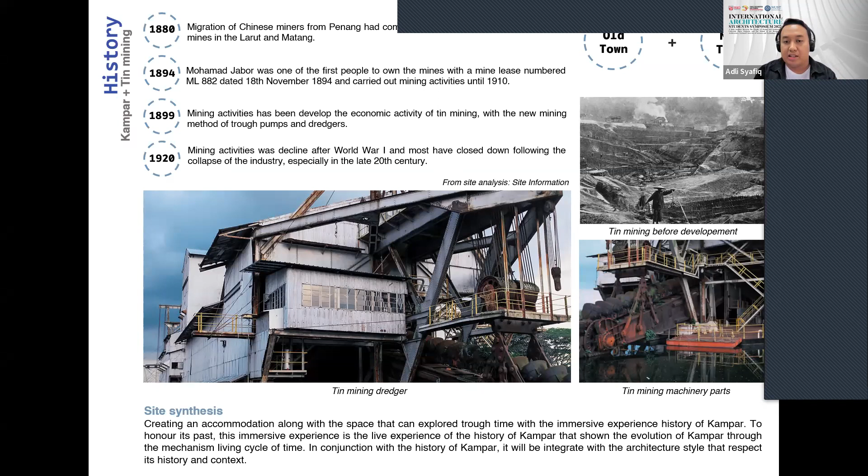So from this history, let us dive down on the precedent studies which I've used towards my design, which is in Nanjing, China, which is the Rural Relation Museum Hotel.

This hotel is actually reflected to its site historical. There's use of immersive experience towards the spaces and towards the material also. So this will give some sort of intangible feeling that will bring the visitor or the hotel guests to feel the historical feeling of this hotel.

And then the second precedent study, which is also mentioning about a hotel, but this is about the Crane Hotel. This Crane Hotel was previously used as a coal mining machine, but now has been reformed to be the Crane Hotel. They are maintaining all the materials, the paint, just to reflect the history of this coal mining machine at Denmark.

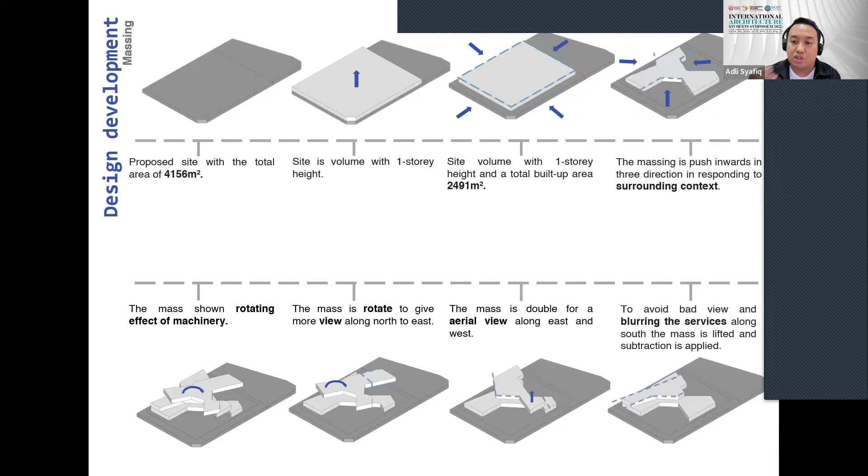And also the volume is volumed up because of the blurring of the services. But the main important idea of this massing is actually to show the rotating effect of the machinery.

And then comes to the thematic hotel, which is the public spaces of this hotel. There are 5 main public spaces, which is the lobby. They integrate the living history of Kampar.

And actually the name of these spaces also reflects the name of the tin mining process, which is the Dulang. It is called Mendulang, which is a method of separating the tin. And then the Dulang Cafe, which is the cafe that is floating in the air.

And the third one is a time tunnel, the Melampan. The Melampan is something that shows this, because it looks like a tunnel, so that's why it is called time tunnel - because this space will bring the people to the historical of Kampar from the past, present, and towards the future.

And the fourth is the library, the Extract. It is also one of the names of the extraction of the tin mining. And the last one is the Vein - it is the gymnasium. The Vein is one of the names of the tin mineral.

And we are going to the guest room. There are 5 guest rooms, which is the Kaolin. The first one, the Kaolin - this guest room is named with the tin name, which is the kaolin, the ore, the mica, the feldspar, and the bauxite. These 5 are the types of tin that present in Kampar.

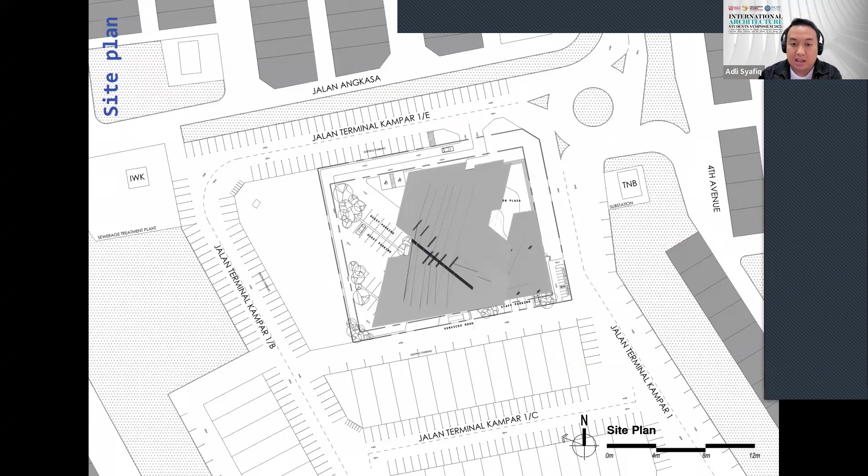This is the overall site plan showing the rotating effect of the Kampa, and also on the roof there is some structure to show the machinery effect. And this is the ground floor plan.

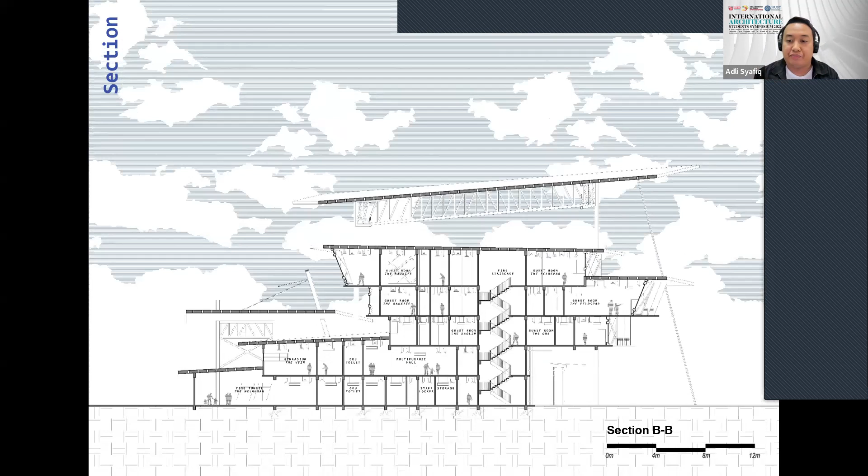So this is the section. As you can see, there is richness in the structural exposition here, because it mimics the idea of machinery of the tin Kampa, tin mining. Sorry, this is also just to reflect the idea of the tin mining industry in Kampar.

The passive design strategy used here is a self-shading building, because there are many cantilevered floors towards the upper floors, so that the floor below will not get much light glare. There is less natural light glare towards the inside.

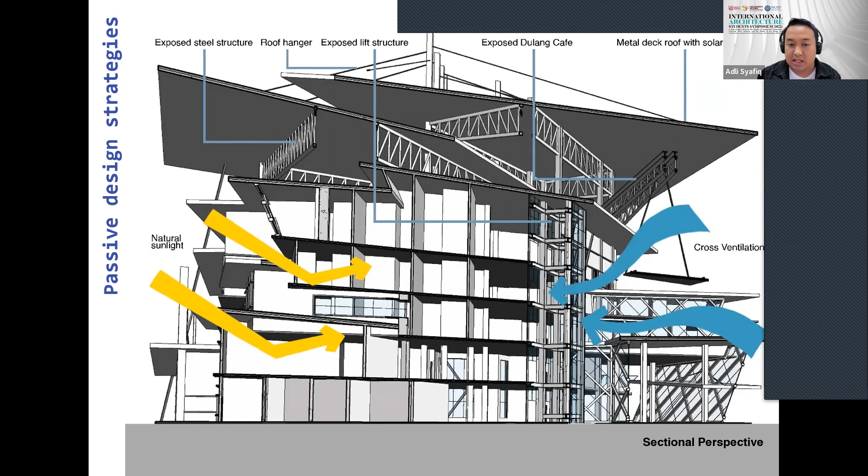And this is the exterior view. As you can see, there is the Dulang Cafe, which I mentioned just now, that is floating in the air. At the plaza below, people and visitors will also see the beauty part of the Dulang Cafe, which symbolizes the tin mining industry.

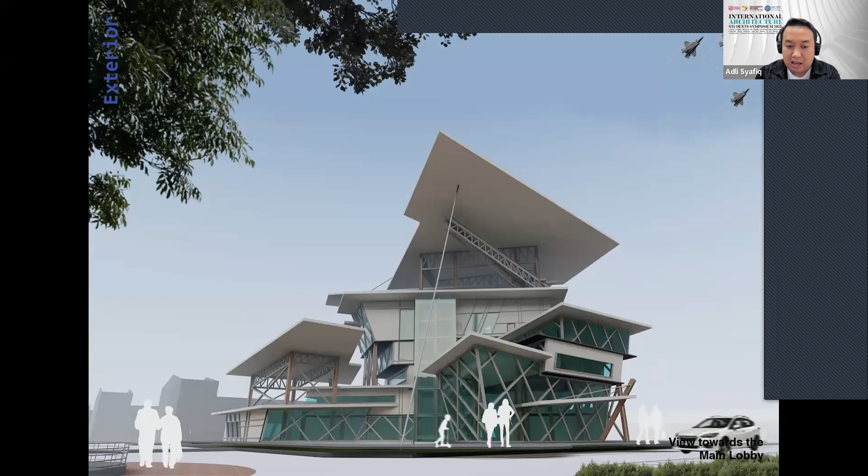And this is towards the main lobby view. And that's it, thank you.

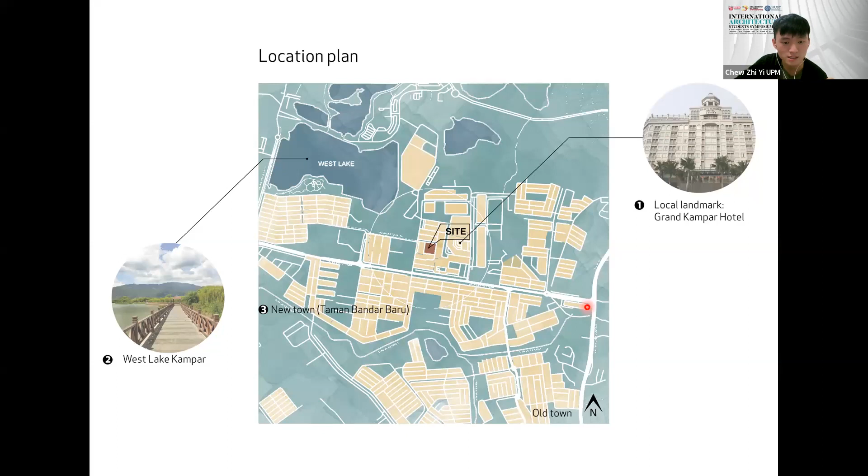Secondly, West Lake Kampar, located at the far northwest side, offers a great view. Thirdly, a slight introduction of our site: it is located in Kampar, which is divided into New Town and Old Town, and our site is located in New Town. I'll be explaining their difference shortly.

The shop lot surrounding the site is a unique feature itself. It implements European architecture language. The business comprises cyber cafes, reading lounges, hypermarkets, printing shops, etc.

A little info about Kampar is that the majority of the people there are Chinese, followed by Malay and Indian. Kampar is an educational hub itself.

For the strength, our site is at the center of businesses, and we would like to foster the cycling culture there. The weakness is that it lacks shades and public space. The opportunity is that it has potential to have an open plaza and green space. However, the threat is that the night is silent, and people often relate darkness with danger, hence low sense of security.

Enough of the analysis, let's jump to the synthesis. This is a collage that I made that represents the idea of turning the nighttime into a place with strong cultural value and an interactive gathering place.

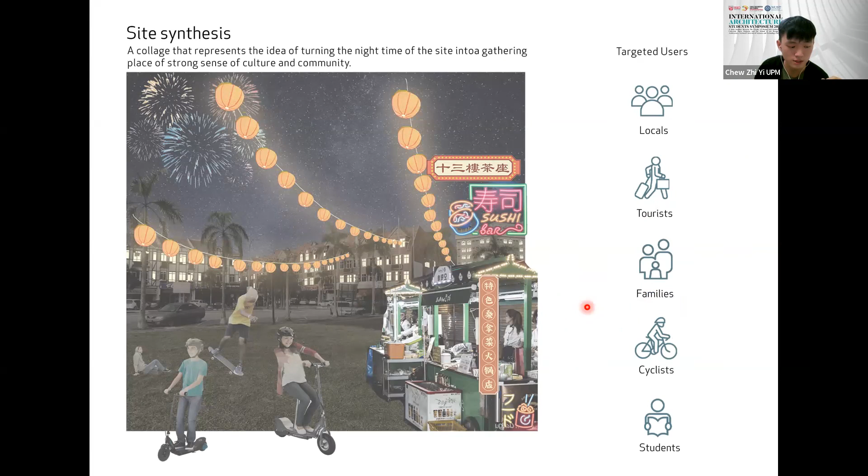I'm a local in Kampar, and when we had our site visit, it reminded me of my childhood here. It reminds me of how fast my hometown has changed and developed throughout the years. During the site visit, I perceived bits and pieces that I had not paid attention to before.

I'm attached to Old Town, and now there is the New Town, which is totally different from the Old Town. In terms of the architecture language itself, it's totally different. The New Town has a European architecture style, while the Old Town uses vernacular shop houses.

In Old Town, we still have this kind of watchmaker shop, which I remember my grandpa brought me to, to fix my watch. And then I remember these old grocery shops that I always fantasized about, buying each kind of snacks and biscuits. Back then, they didn't have fancy packaging, only these metal containers that you need to use a spoon to crack open.

And then there's this bus stop that I used to wait for the bus at after tuition classes, and now it's gone, moved to the New Town. And then there's this old TV that you need to give a few love smacks for it to turn on magically. And then there's this coffee shop that my grandpa used to bring me to.

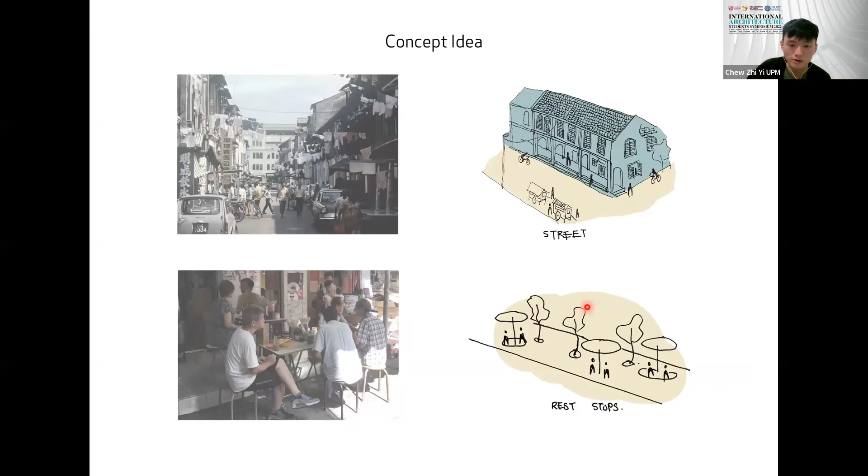That's the coffee shop, people used to gather there. So why not suggest rest stops for people to gather around in my building as well.

During the past, not every household had the privilege to own a television, so people would gather around one person's house and watch football or TV shows together. So why not have a public theater and art performance area so that everyone can watch together.

And during the past, we would have food and hawker stores along the streets, so why not have this same kind of element in the building as well. So I've reached my design approach.

As you can see, I have a street tilted along an exit that opens up to an opening, creating an opening to the Grand Kampar Hotel, the local landmark, which has an implied meaning that it connects the old to the present, the past to the present.

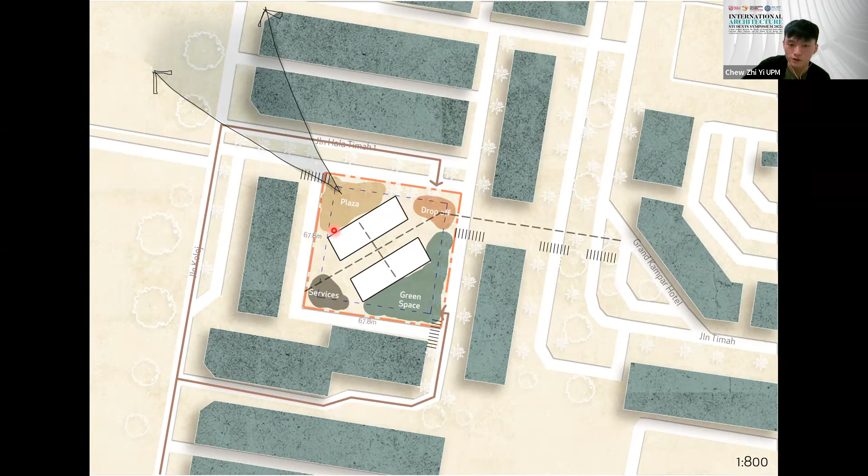And then there's a plaza that opens up to the lake, the West Lake, if you remember. So if my building builds up enough with enough height, it can oversee the great view at the West Lake. This is the design development.

Firstly, I've got the existing ingress and egress ready, and then I introduce a street that breaks the mass into two. And then I introduce an identity for the building, where the curvy roof is derived from the traditional clay tile roofs from vernacular shop houses. And then with a little bit of facade treatment, some voids and solids, it becomes nice.

This is the design outcome. Firstly, there's a street along the center that opens up to this junction. And at the ground floor, it's fully public. There will be coffee shops and then shop lots.

The general intention in designing the ground floor is that it would be inviting and welcoming to the people. People from the road can access the coffee shop and then the street, while people coming along the street have the view open towards the coffee shop as well. So it's like a double frontage.

Moving on to the first floor plan, when we build up in height, the space changes from public to private space. So on the first floor plan, we will have private spaces like the accommodation suites, and a mixture of public spaces like a reading lounge for students, because Kampar is an educational hub, and then there's a coffee shop, which we locally call kopitiam.

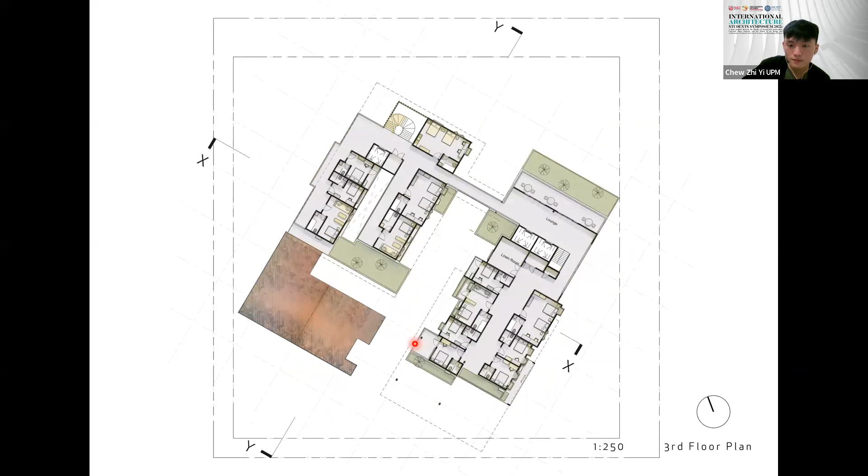And for the second floor, we will have rows of accommodation suites, same with the third floor plan. And with the fourth floor plan, we will have a rooftop bar that faces the northwest side, where you can have a great view towards the West Lake.

I have several types of hotel suites, so with this different type of hotel suite arrangement, it creates depth on the facades. This is a section. So the ground floor would be shops, a public space, and then built up higher would be a private space for accommodation suites.

This is a sectional perspective. We will have a street at the center, so the ground floor would be fully public, with double frontages that invite people to come to this place. Well, if you live up there, you can oversee these crowded and busy streets and enjoy this kind of little neighborhood community here.

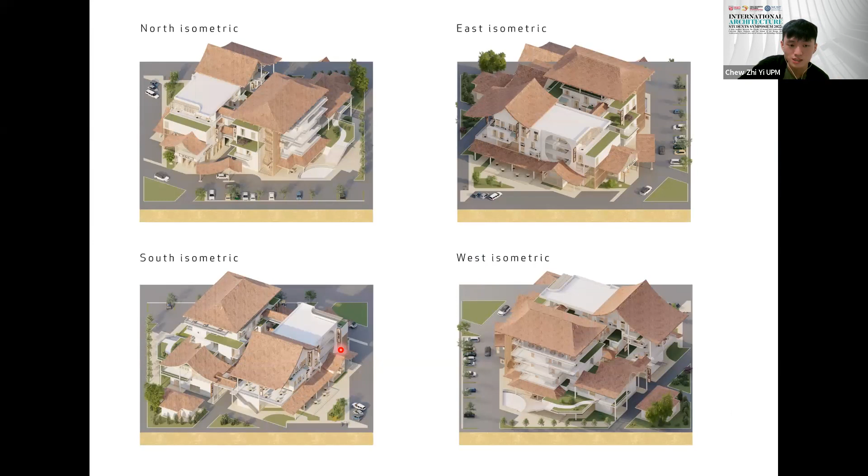That's what I'm trying to achieve in this design. This is the isometric view of the building from each side, and the elevation. So I play with different heights, creating different heights and depths so that the facade will not look boring. So the outcome is that on each of the four sides, the view is quite interesting.

I figure that an exploded diagram really helps you experience the space. So on the ground floor, the double frontages, the street splits the mass into two. And on the first floor, you can see there are numerous accommodation suites. They are arranged in a way that leaves a certain small space between them, to create a green pocket that invites ventilation and light into the building.

This is the second floor plan, second floor isometric. Same again, it comprises accommodation suites, but with green pockets between the suites. Then on the third floor, we will have a sky bridge.

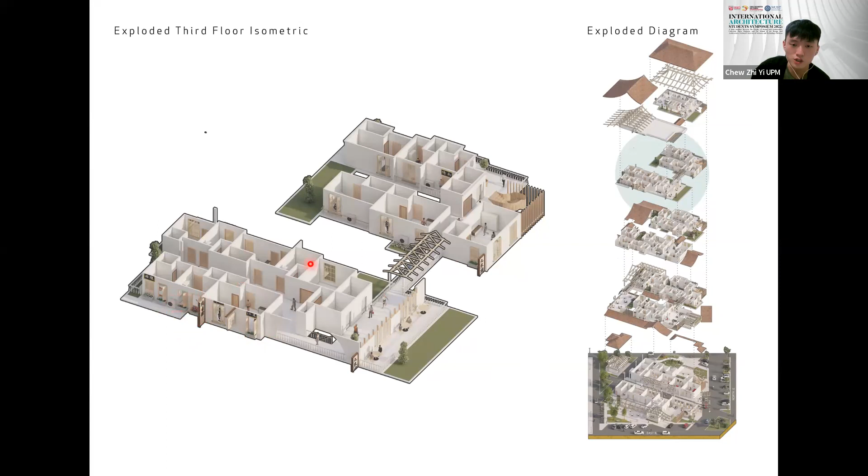And if you notice the facade, I tend to reveal the services like the air conditioner unit. People tend to conceal it nowadays, but in the past, people made it an element on the facade itself, like the advertisement board, the planter box, French awnings, and the air conditioner units. They make up the elements on the facades.

This is a fourth floor plan, and this is the topmost floor with a rooftop bar on top. In Malaysia, we are a tropical country, we have a lot of rain, so we need large overhangs to cover the space.

This is the interior perspective. What I want to achieve here is to break the norm of typical hotels, typical hotel rooms. So what I want to create here is a hotel that makes you feel like home itself.

Therefore, I reached the end of my presentation. I want to explain why I named my project Belonging. It has two meanings. First, it represents my sense of belonging to this Kampar, to this place. Secondly, it means a period of time I want to go back to, but we can't reverse time. So what I can do is be yearning and longing for this era. By the way, this is a sectional perspective cut that cuts along the street, so you can see the shop lots on the ground floor, while there's a nice community neighborhood on top that makes up the upper floors.

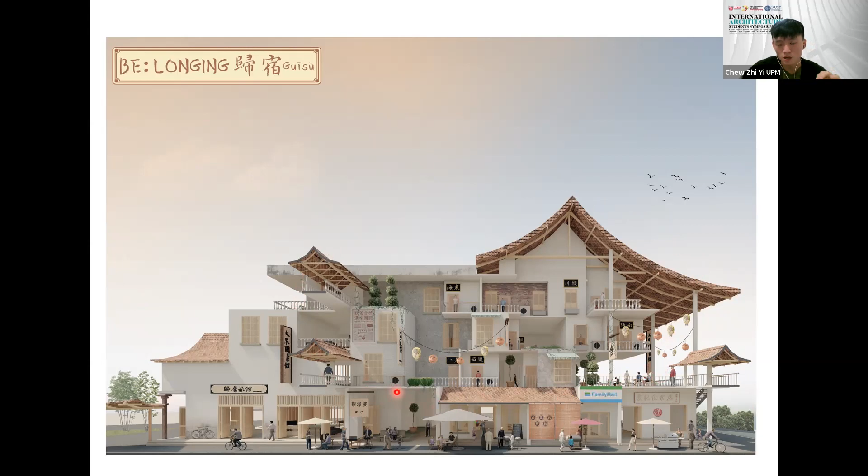Thank you. If you want to have a look again, you may access it with this QR code. Thank you very much, Zhi Yi. It really looks like an interesting concept and project.

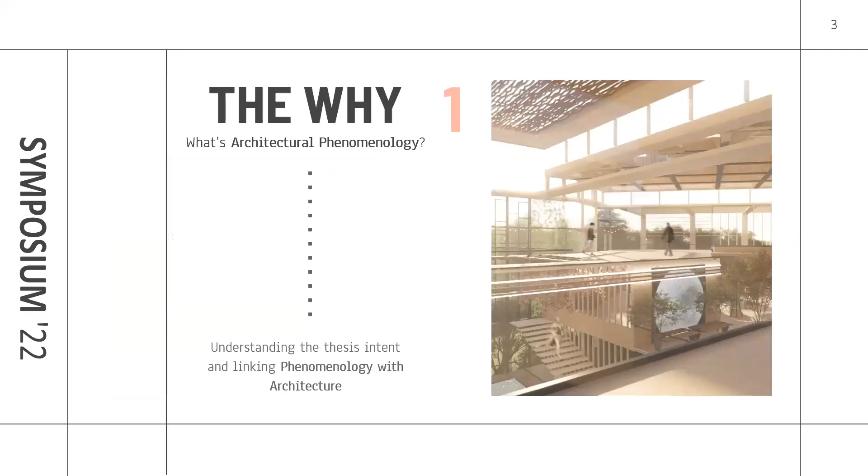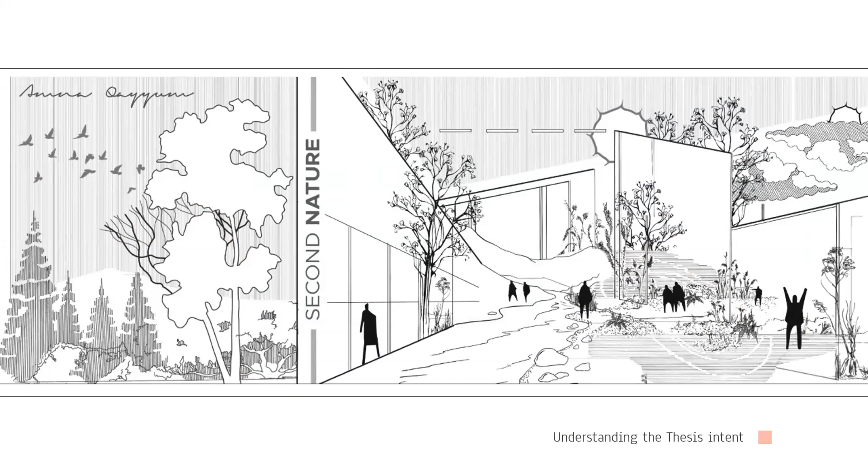One way to exhibit experience is to understand your context. This here is my school, Sada, but to help you understand, the concrete structure is not where the phenomena lies, but rather the experiences, perceptions, and associations of people with this building. That's what this concept sketch shows. Underneath the built realm, there is a whole realm of subconscious associations which have the potential to be manifested in design. It's in those forgotten experiences where we find human experience.

So how did I go about that? To understand that, we have to see the subconscious experience I focused on. I live here in Islamabad, and here we have this eco-grid that runs under this 2 by 2 kilometer vehicular grid. So as a resident of this city, you don't really perceive this eco-grid while traveling on the vehicular grid. That is something that has fallen into the subconscious of the people.

Interestingly, in the initial planning of the city, they wanted these ravines to be a very integral part of the lifestyle here. It was supposed to be explorative, nurturing, and recreative. I created these sketches to showcase what the initial reality was supposed to be. But what's happening in the current situation is that these ravines have deteriorated into carriers of urban filth, and they are now really just thought of as a nuisance to city life, not very important anymore.

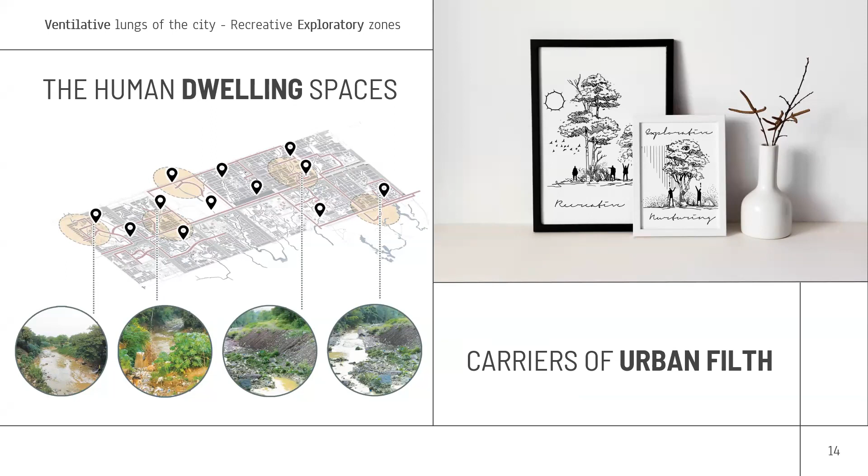Hence, the focus of my thesis surrounds the uplifting of that forgotten network of streams in Islamabad and bringing it back into public perception. For this, the typology of a nature interpretation center was sought after as a means to encapsulate the beauty in this natural attitude.

This is the program list, but in short, there were primary and secondary programs. Primarily, I wanted to create an envelope which captured the feeling of walking by these ravines and the natural flora of the place, which I represented through these sketches as biomes. Secondly, I wanted my building to play a part in purifying the wastewater infiltrating the eco-grid through a series of self-cleaning constructed wetlands. I'm not saying the building fixes all of Islamabad's problems, but it is meant to highlight the beauty of these forgotten spaces and the need to preserve them.

So this is coming up the site. The site itself is pretty fitting for a nature interpretation center in the sense that it is this beautiful historic garden in Islamabad, which is well connected to the urban realm through a series of pedestrian and vehicular linkages.

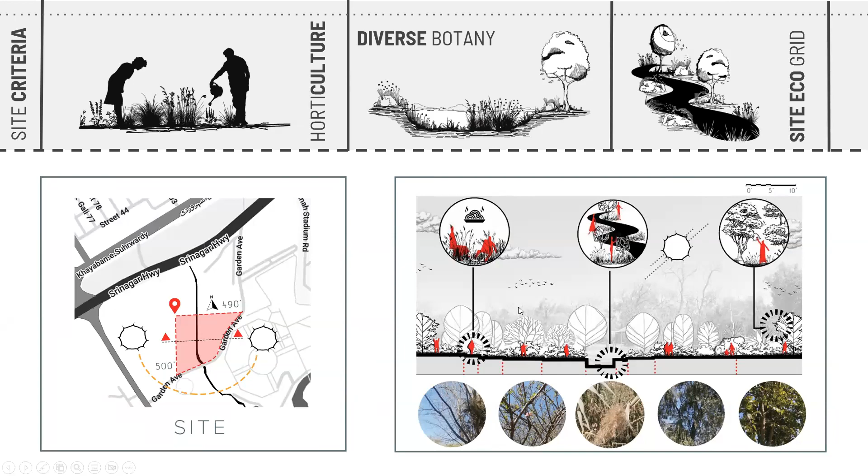It fulfilled the requirements of an existing space where there was already a fondness for the environment and all its natural elements. It's a space where people of all ages come together as a collective to sit amongst its trees or to occupy its open spaces.

But due to human interventions, the site still is deteriorating quite rapidly. So this is actually a documentation of the stream that's passing through my site. And this white fluff is actually chemical waste that is released into the stream water.

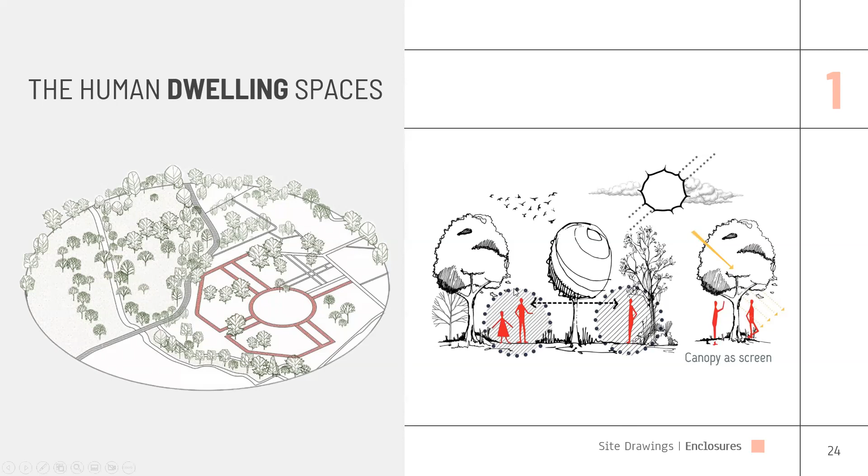So I felt that my nature interpretation center could help purify the site, but also bring together the community and showcase why it's important to preserve these spaces, especially because Islamabad is nicknamed Islamabad the Beautiful or the City of the Streams. So the way people interacted with the site was noted, and only four techniques were extrapolated.

The entire building was built keeping in mind how people were interacting with the site and how the natural factors played a part in accentuating this experience. That intangible experience was translated into the building envelope. And finally, the design synthesis.

So the focus for today is going to be the biomes, which are going to exhibit that botanical diversity that we see in ravines. This idea of permaculture, which talks about the recycling of organic waste generated from the various entertainment areas to propagate plant life, and the upcycling studio.

So this is how the building actually sits within the site. Next to it, we have that rose and jasmine garden, which is a very geometric form. I haven't really included any parking in the site area because I wanted people to walk and make their way through the garden and into my building, experiencing the sights, sounds, and feels of the garden. The only parking would be the existing parking for the garden, but that's pretty much it.

The programs are strewn across the built form, creating a journey as you travel from the sweet-smelling garden to overlooking the stream passing through the site. The floral and wet and dry biomes are all located next to the relevant markers on site. The form was optimized to bring in this idea of porosity, this idea of light, and vantage points through leveling.

So let's talk about the entrance. I wanted people to experience the beauty of the flora of the garden and the sacredity of these spaces within Islamabad. I wanted to capture the feeling of light breaking through the leaves.

And hence, moving from that brightly lit landscape of the garden, owing to the short heighted flowers here, we come into the low light of the interior that I designed. And that talks about a certain level of sacredity as well.

The rustic material palette, the open and ambiguous spaces of the entrance, it is what greets you upon entry. Nothing is set in stone, and you're allowed to explore as you will.

So this is just an animation of how the light starts to filter in, and it starts to give way into some of the first biomes.

So the first biome had to be special. I wanted it to be related to that garden that people just walked through. So the first biome was going to be the floral biome.

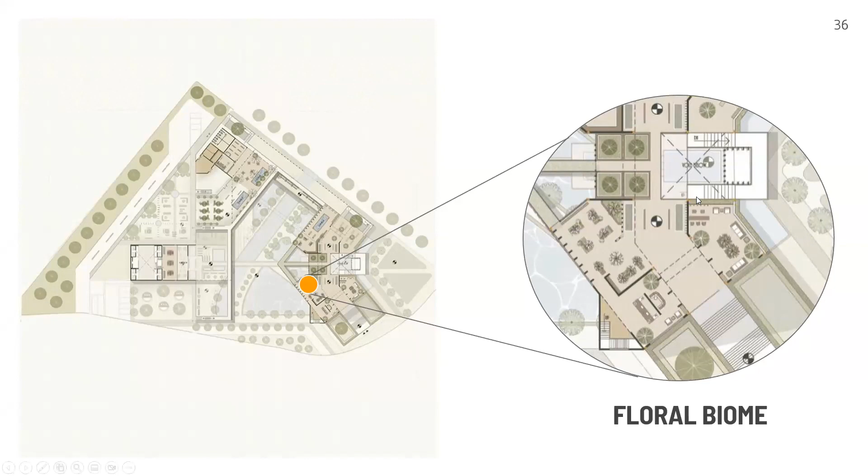Here, the native flora of the ecogrid are represented in low-lying modules. And the reason they are low-lying is to mimic that short heighted flowers of the garden.

But more importantly, right here, you can see that when they come closer to inspect these colorful beings, you catch the first sight of this stream flowing through the site, encapsulated by this mirage of flowers reminiscent of the original eco-grids of Islamabad. The architectonics of the space have been kept very minimal to prevent any obstructions to the view of the water. Essentially, the entire building is about framing this body of water from different instances.

The plantation throughout the complex is kept alive through a series of hidden techniques, which regulate the temperature and moisture content within these enclosures while being invisible to the users. So this would be in the form of these chilled slabs and porous roofing for temperature control, as well as specifically designed modules.

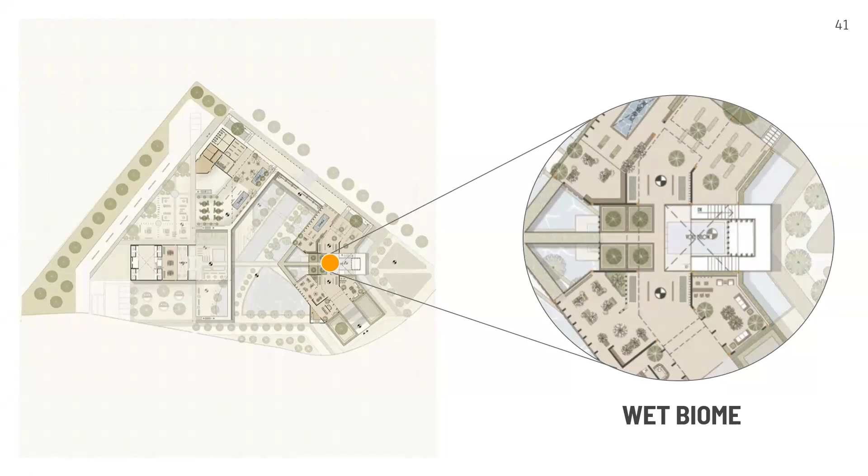So showcasing the water is when I decided it's time to feed into that curiosity and create that wet biome. This comprises plants that require high moisture content to survive. The wet biome is special because it spans across two levels. The user sees it from a higher vantage point before getting to experience it in person, and these playful hints of what's to come keep the user moving forward through voids and vantage points where you peer into the biome first.

Here you can see the leveling design for the wet biome and the thatch roof that's constructed with aqua reed. This plant is only found near stream water in Islamabad, so that was a special consideration on top of this biome.

Next is the dry biome, which is characterized by plants that do not require higher moisture content. The dry biome is purposefully placed next to the tree enclosures on site so that when you stand here, it feels like a continuation of that tree line. An understanding of solar orientation ensures that light always breaks through the tree canopies before being allowed inside the building.

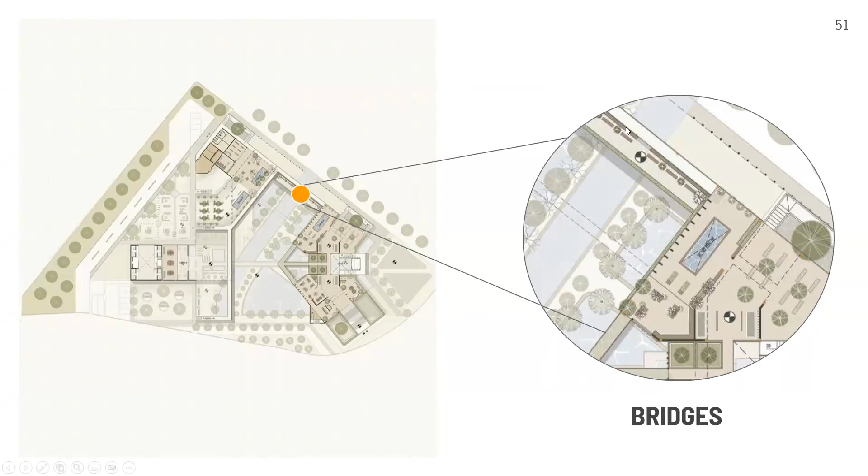Next up is the network of bridges that connect these two portions of the building, allowing you to once again walk over that stream water and become acquainted with the site. All three biomes are experienced through a similar series of bridges, creating alternating solids and voids within the design. This image showcases how you would actually cross the bridge and where the trees are located so that you would always be connected to them.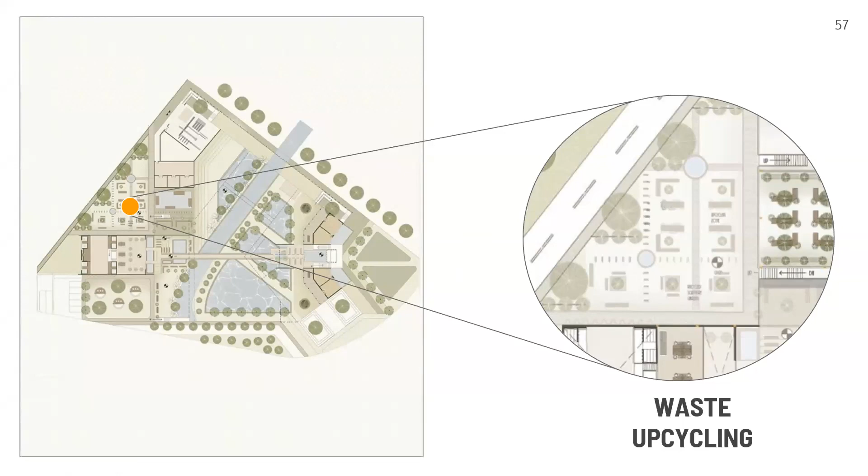Finally, we have the waste upcycling area, which is really just an open-air creative studio where inorganic waste collected from various points around the site is sanitized and repurposed by the community. It not only acts as a creative outlet for the community living around the garden, but also one of the first public ventures for the citizens of Islamabad.

Some links were made with the adjoining Aabpara market, which was a major source of inorganic waste coming into the site, so collection points could be created here so that they can be repurposed in my building.

And that's pretty much it for me. Thank you so much.

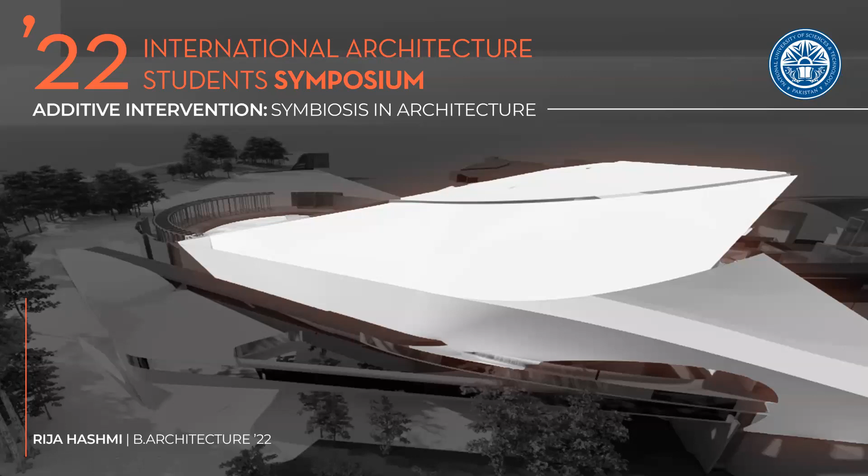Okay, so my name is Rija Hashmi. The title of my thesis is Additive Intervention Symbiosis in Architecture. My thesis statement states that it's a project about additive interventions on architecture, conceived in evolution to introduce a new typology, and basically it's to enhance the experience of a communal space, creating a synergistic performance hub. So essentially the typology is a performance hub, and it's a symbiotic take on what's already existing on site.

So the concept was essentially what I wanted to explore was symbiosis. I wanted to explore it in a way where I take an existing form or an existing program and introduce a new, more developed or more evolved typology of it.

Symbiosis in its natural definition means an evolving interaction between two different organisms. It's a biological concept that has to do with an association between two vastly different organisms and how they create a mutually beneficial relationship.

Translated into architecture, this becomes a mutualistic relationship where both symbionts, the existing building and the new intervention, have different physiognomies, meaning different spatial, formal logic or material expression. But essentially they both coexist and help each other grow.

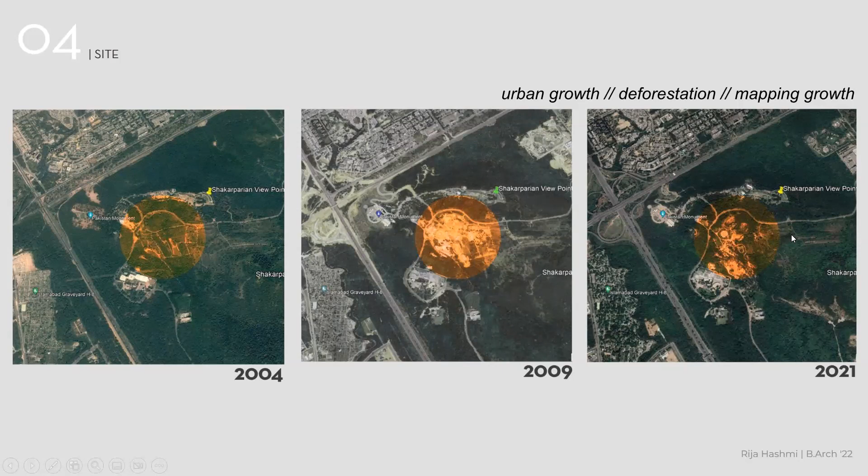The Bethak area—Bethak is essentially an outdoor gathering space—is fully constructed, but nothing else on the site has been built, and the main gates that were allotted were never put in place.

Instead, people started using these sites for abuse—there was a lot of drug use, etc.—and so they created their own elephant paths, which then led my design.

In site mapping what's currently existing, you can see these are really large concrete structures that are sparsely located, with no formal connections between them in terms of landscaping. When I started looking at the site, I started seeing which concrete structures I could utilize to build my thesis on.

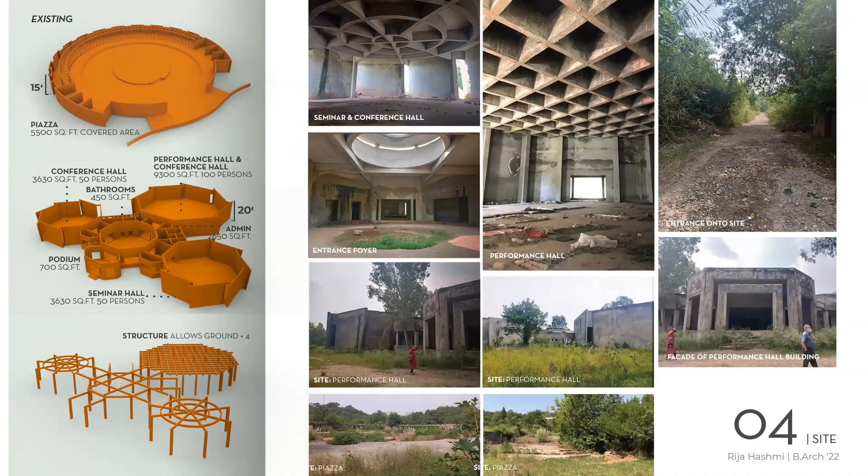And so that is one consideration that I took into my own design, and how the main entrance onto site is not celebrated enough. You can barely see the concrete structures inside, as on the rightmost image on the sheet. So this was a timeline that I came up with of what exactly happened on site.

In 2004, the planning was initiated. In 2007 and 8, construction was initiated on site. However, in 2009, the construction was abandoned. And in 2010, the project was essentially supposed to be completed, but it wasn't.

And so in 2012, 13, and 17, all of these different programs that were initially zoned on this site were now placed on other neighboring tourist destinations in the neighboring Arts and Crafts Village or the Pakistan Monument, which are also very big tourist destinations.

So these programs were now moved outwards, and so this leaves room to introduce more programs on this site and replace the ones that were existing, or build a better connection.

So once I started looking at how I can build a connection with the existing building that I have on site, this is part of my research of how Bollack, the author, introduced how she came up with all of these different possibilities of how you can create these connections with an existing site, and how you can essentially move on to reusing a building.

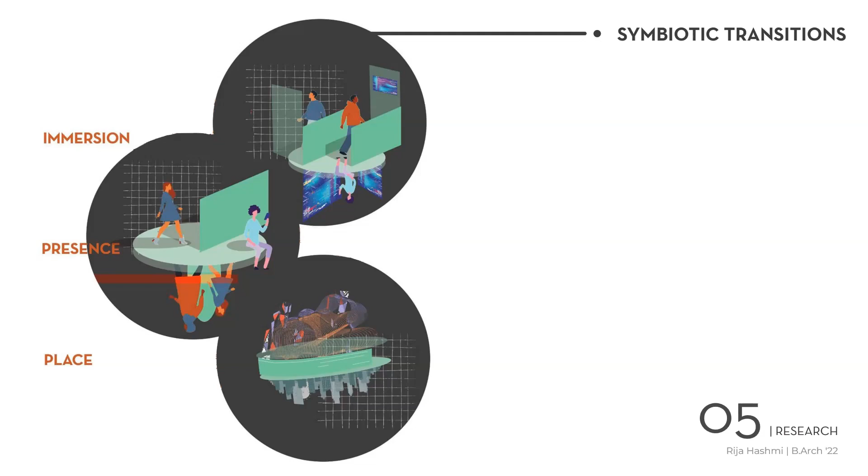So these are essentially how I then extracted my form finding. Now I started placing all of these aspects on my site, and we come to my form findings. So I just defined my axes, which were also taken from the existing paths, the existing elephant paths, as I mentioned in my site analysis.

And then infill. So I started looking at my concrete structures, and I started looking at where I can expand my site and where I can identify the voids for a parasitic or a symbiotic attachment.

Then I started with the point of generation, my central point from where to identify a geometric center, and then to extrapolate axes from there. Then to generate those axes in terms of my heights, taking landform into consideration.

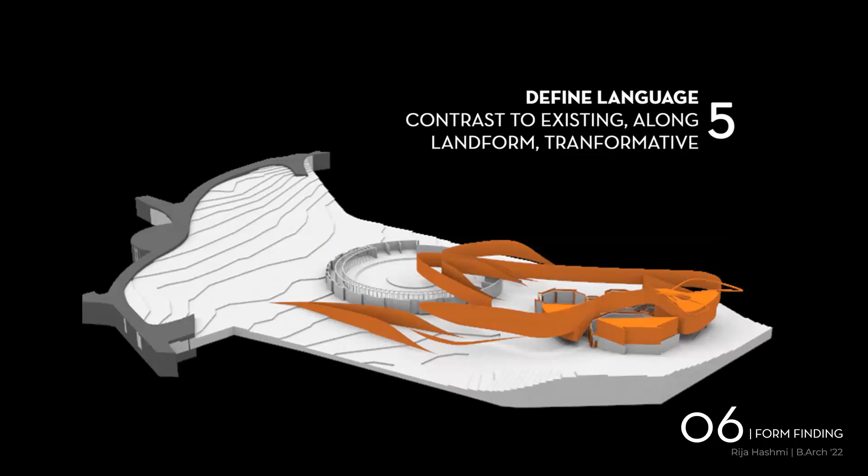Then to define language, I took my form according to the landform, but I decided to contrast it to the existing structure on site so that it could be a marker for passive users as well, and it could pique their interest to come onto site and explore.

And then to raise this, I started looking at the landform and raising the form to cater to the increasing contour ahead of the performance hall, and raising the form from the center of the complex to allow circulation to the rest of the complex if they decide to build onto the rest of the complex in the near future.

Now the final form essentially is a symbiotic structure that is then attached to a concrete structure, but it really does take into account the rest of the structures present on site, and the existing circulation on site as well. So this is a master plan that I came up with.

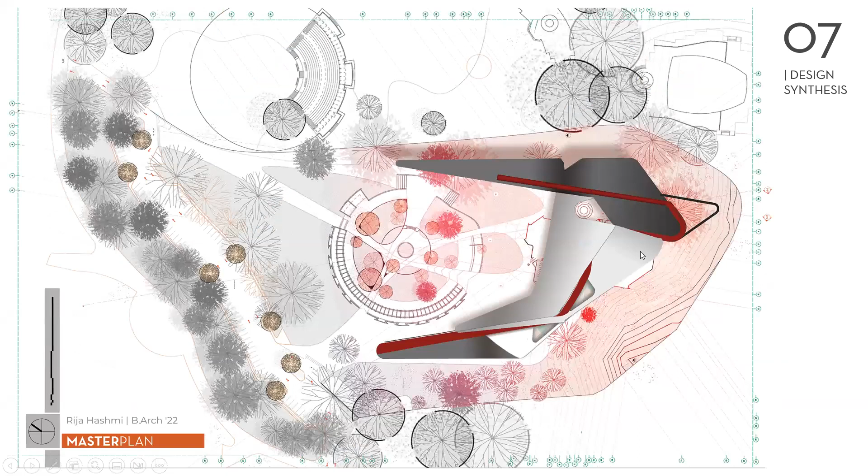Along this red loop is essentially how your experience changes. So you first go through all of your studio spaces, you learn how your transition from physical to a digital world is happening. And then in the exhibition spaces at the top, you start seeing your digital exhibitions.

So it's reflecting your nature all around you. But also, if the users keep visiting the site all throughout the year, they will have different experiences every time they come. And that really does play a very important part in the experience this generates for the user, in terms of the entire transformative space I am creating for them.

From existing to an intervention, you start seeing all of these spatial formal logics that have been put into play in terms of this design. So there's lots of interconnectivity between all of these spaces, and a response to context.

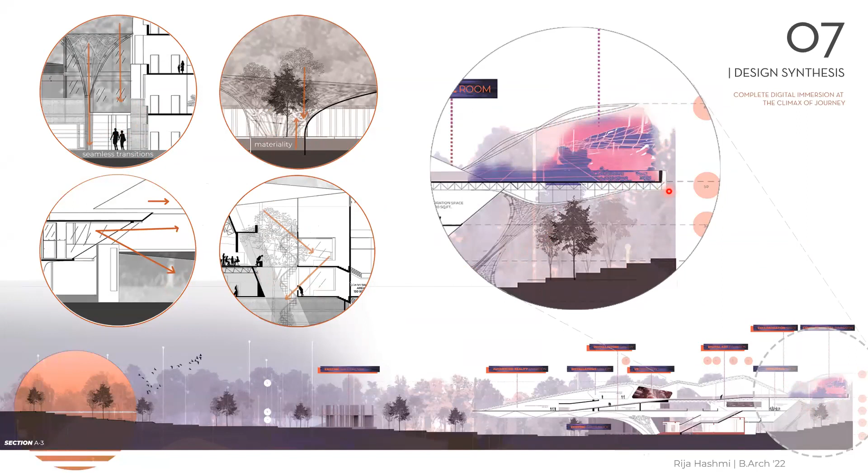And so you have materiality changes, you have seamless transitions between all spaces, and then you have this one main space where essentially you become part of the installations. And so that's where the digital immersion reaches its maximum.

And so these are a few renders where you can start seeing all of these different connections being formed. This looping path takes you through all of your public spaces first, and then you start having access. While you don't have access to this private path, you can still see it, and you can see all of the activities going on.

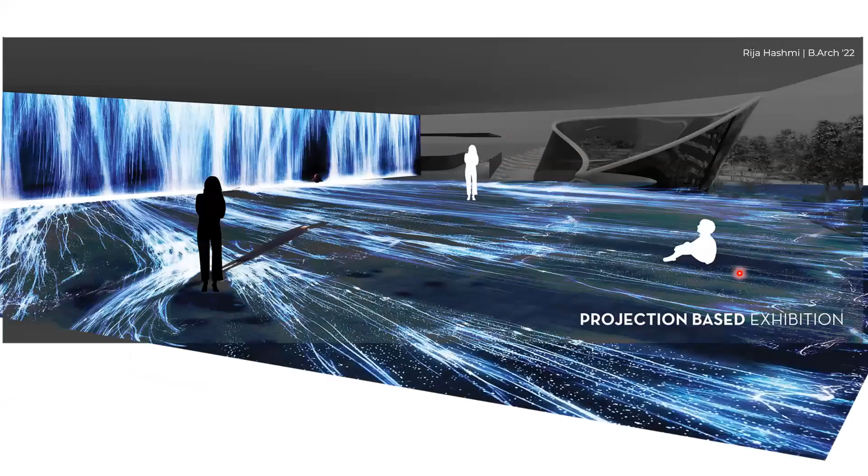And so this is how circulation goes on. You go from your studios to your digital exhibits. This is the main collaboration space where all of your paths essentially look down into this space. Then this is one introverted space being formed. And then this is the projection-based space where you become part of the installation, and your shadows essentially guide the installation.

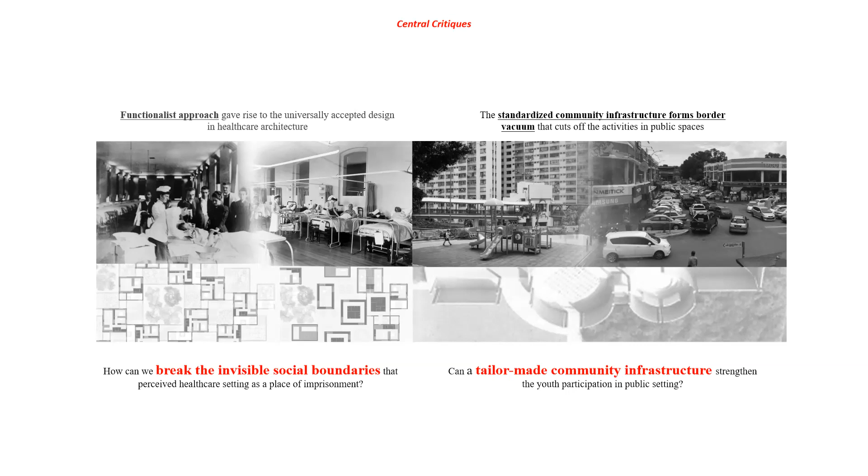So this leads to my thesis framework, which aims to reshape the borders of care by crossing the invisible and visible boundaries and restructure a new model of care center by bringing back the neighborhood memory in the youth discourse. So in attempt to investigate the relationship between architecture and the memories and identify how all these collective memories, the youth movement, daily experience can be translated into the spatial qualities.

So the main building program will emphasize on the youth daily activities, rehabilitations, mental restoration through the health and learning facilities. So the chosen site is located in Cheras, which is a suburb of Kuala Lumpur that borders between two states. This fits the site criteria that depict the aspect of urban life.

The site surrounding is dominated by the residential district and the healthcare facilities, which will also face the issue of neighborhood expansion due to the generation gain and dense population by the housing development. So Taman Midah will be the selected neighborhood, and it has close proximity to the hospital, which is over this side, and also the housing development. So they also have dilapidated open spaces that are scattered within the neighborhoods.

So the massing of the building itself is to lower down the building volume by cutting down the building mass vertically to enhance the visual visibility to the surrounding context.

Next is to densify the building horizontally. So the volumetric complexity is formed through a rupture of blocks in a smaller scale. This one can be referred to as a city made of rooms model.

Another one is to create the 3 sites with the suspended movement. This is to maximize the circulations and the point of contact within this neighborhood, and this mass movement also allows us to create a fluid event within these 3 sites.

So the intention is to deinstitutionalize the building itself by creating a wall into a different type of volume, which is to create wall rooms, and also break out into in-between spaces between each wall.

The spatial recognition is to create a curvature movement that enhances slow thinking while surrounding the sites, and also to create a sense of familiarity in the spatial transitions.

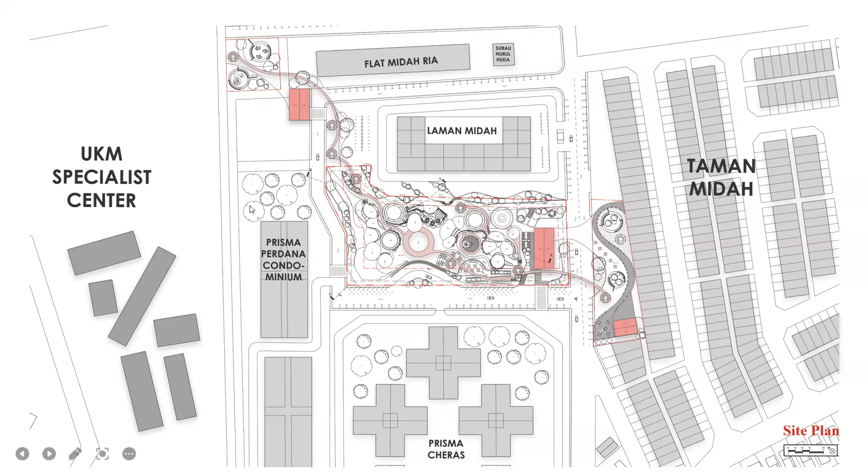It acts as a symbol of infinity that represents the stability and unity for the community, and also intended to provide a wall street in between all this building itself.

The extended wall will open a plurality of direction and maximize the interaction between all the spaces. Afterwards, it's continuously connected with a single continuous path, which leads to the center and also breaks up the rhythm of the public space.

So the intention is to break up big public spaces into smaller parts so as to create a different movement surrounding the site.

So the network of deinstitutionalized spaces will act as an extension from the surrounding facilities, and the activities reflect the contextual behavior of the community itself.

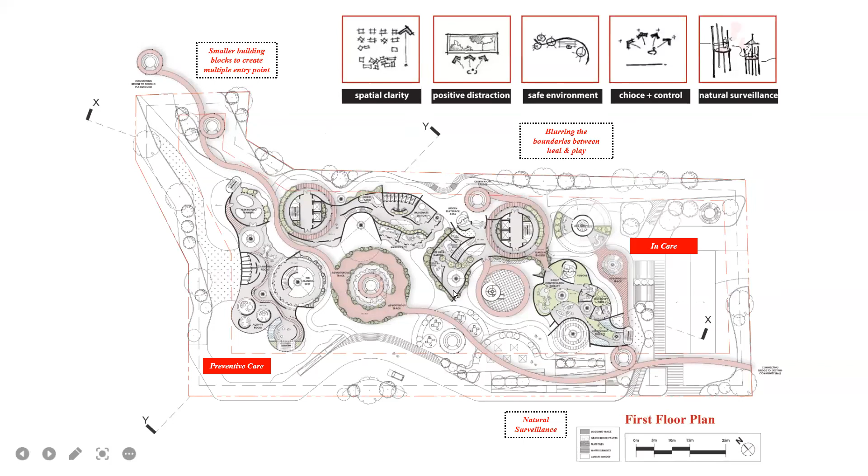So from the route, you can see there is a strong sense of the smell of fragrant flowers injected along the sides to permeate the environment, which will also help to trigger the navigations to the surrounding.

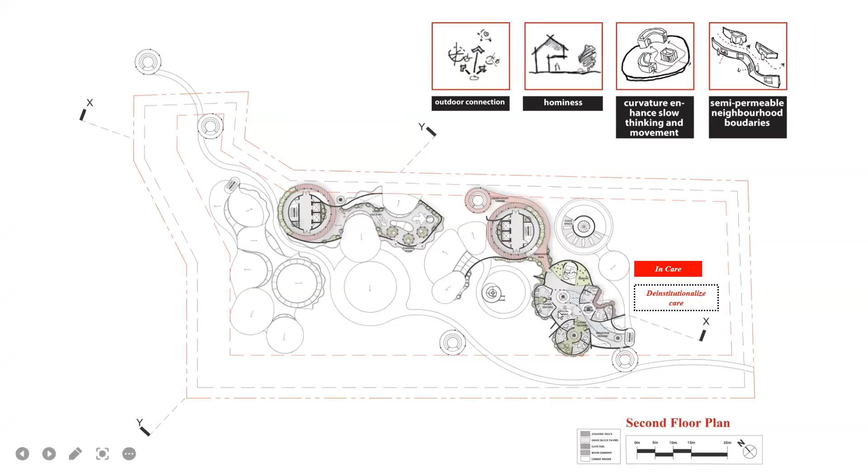So going up to the second floor will be the living quarters for the youth with mental illness. So the idea is also to deinstitutionalize the care in between the building blocks rather than confining all the spaces in the same place.

So the openness and the porosity of the wall are breaking up the monotonous texture of the reflective surface in the conventional living unit, like you can see from the hospital. So the idea is that the building is actually opening up to the other levels, prioritizing local materials and creating a homely atmosphere in the building itself.

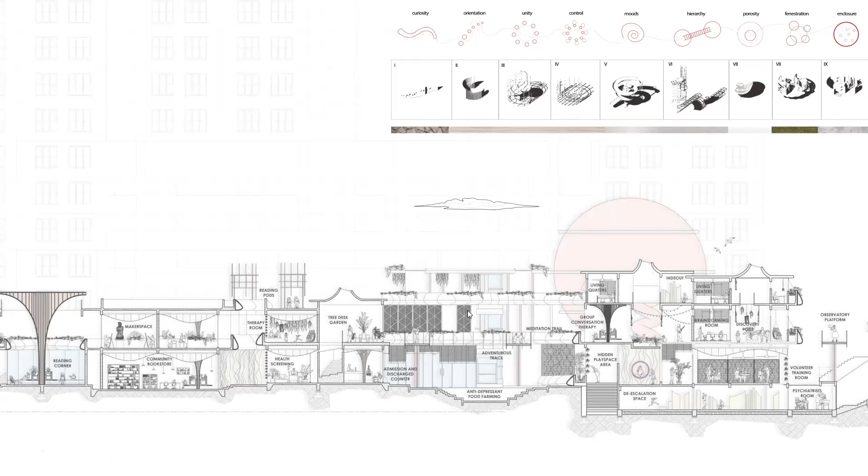So this one is the journey experience of the overall building. The first intention is to attract the youth by providing a lot of play elements at the entrance at multiple points. Afterwards, we create excitement of the movement in between the route.

Afterwards, moving on, we connect the kinships to act as a cohesion between the youth community and the other public spaces as well. Then we control the youth movement with natural surveillance, moving up to the meditations and also the intimacy of the space. So the program itself breaks into 3 programs: in-care, preventive care, and aftercare.

And these are the elements that form up the intention of the spaces. So that's all for my presentation. Thank you.

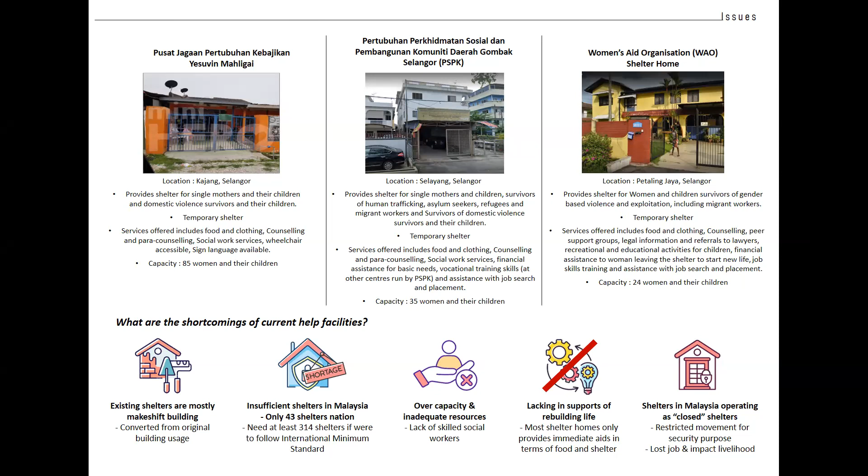But this impacts them in terms of losing their jobs and also their livelihood.

In terms of the thesis framework, safe places and shelters provide safety and refuge to women fleeing domestic violence and in need. Hence, there is a need to remodel the typology of the women's shelter in Malaysia to improve the existing condition. Therefore, this thesis will explore the correlation between DV survivors and the built environment through a healing design approach and its ability to assist them to heal from physical and psychological effects of the violence.

The theory applied is Maslow's hierarchy of needs, a theory of motivation involving 5 levels of a model of human needs: phase 1, the basic needs; phase 2, psychological needs; and phase 3, the self-fulfillment needs, which further derive into the basic needs of the programming, such as the food bank and donation hub, the community kitchen, and emergency shelter.

This serves as the short-term approach, while psychological needs, self-fulfillment needs, and the breakthrough that integrates with the community serve as the long-term approach. Therefore, it developed into the program intention to provide emotional resilience, physiological resilience, and economic resilience to the women in this home.

It goes into 4 stages as they arrive throughout the journey with the accommodations provided. Stage 2 is for healing and rejuvenation. Stage 3 is empowering them. And stage 4 is reconnecting back to society and breaking the isolation typical of conventional shelter homes, which are usually located in hidden and secret places.

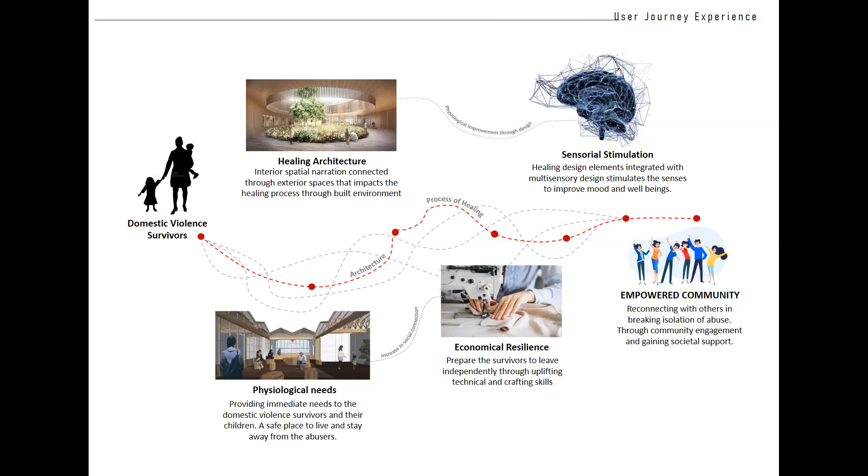So the spatial quality to be integrated falls into three major categories: safety, healing, and rebuild. This includes a few separate entranceways with layering of space and natural surveillance, while also taking care of privacy and transparency across the overall spaces. For healing, we integrate greens and nature from outside to inside.

With bright and airy spaces and sustainable design to take care of their emotional well-being as well. And last but not least, to rebuild through positive energy, free movement without constraint, and a common ground for social connections.

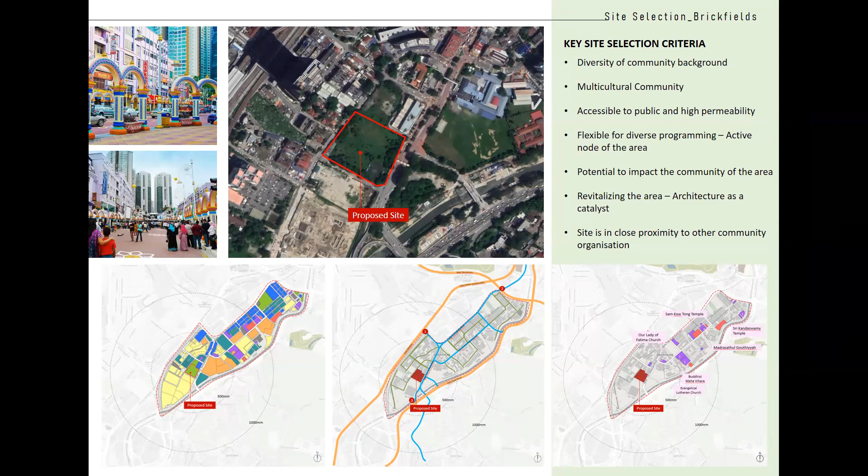The key selection criteria: there were a few sites studied around KL, but in the end I chose the site on Brickfields. This is due to its diversity of community background with a multicultural community, and it's easily accessible, which contrasts with the conventional women's home that is not located in the city center. Therefore, it has the potential to impact the community of the area so that people take note of these social issues rather than keeping them hidden away.

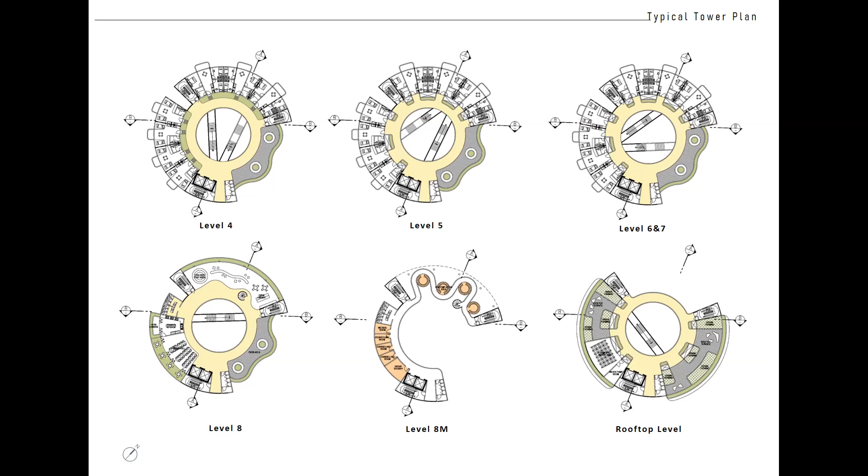The healing paradigm's phase 1 is to heal through self-contemplation. You can see from up here, through the personal space, they have private accommodation and also self-contemplation area, and breakout space at the open landscape area.

Phase 2 is where they go top to bottom. When they are ready and not too confined with themselves, they will go through healing through therapy where individual and group treatments are held together. Phase 3, going down, is healing through learning, where they uplift their skills through tailoring, baking, and vocational skills, and also some public programs throughout this auditorium hall.

Lastly, phase 4 is healing through interactions with the community and also public programs.

As mentioned, the clusters of communities are on top of the building, and within itself there's also its own contemplation area, a more private space for smaller counseling sessions, plus a central courtyard for community interactions with sustainable and green design integrated within the building. So it's not a totally confined building—you can have more open air and natural ventilation going through.

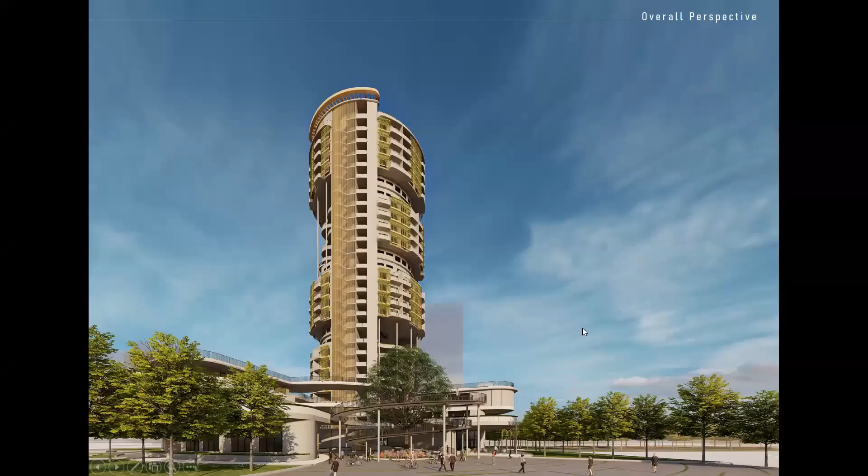And lastly, this is the overall perspective of the women's home.

And that's all, thank you very much.

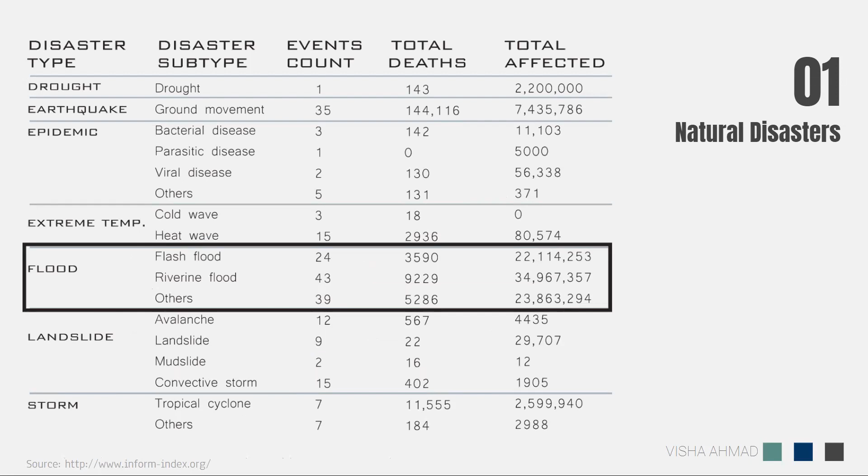The destruction caused by floods is very hard to recover from, and our cities right now aren't designed to be resilient to natural disasters. So every time a flood occurs, all of the infrastructure is destroyed, and it's a process where they have to start from scratch all over again post-flood. The redesigned infrastructure is again not able to sustain floods, so the process keeps going on in a cycle, partly because there's a lack of environmental consciousness.

Floods impact livelihoods, crops, infrastructure, and the economic growth of cities. Areas dependent on agriculture and rural infrastructure are most heavily impacted by floods.

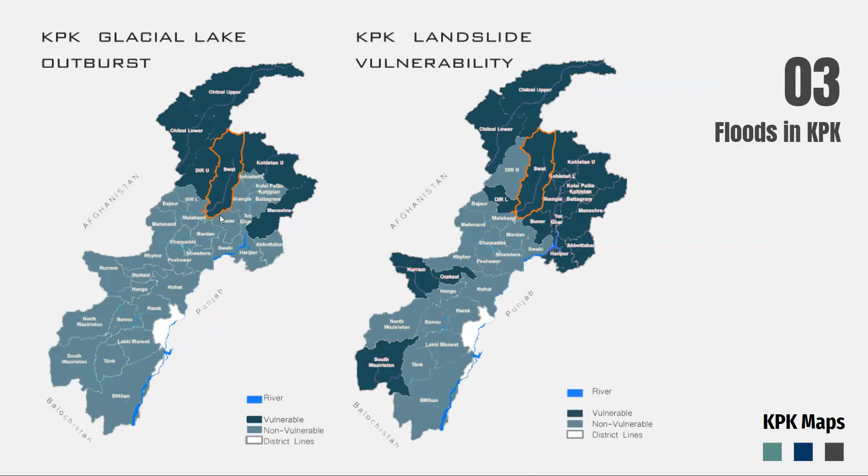Moving into that specific province within the north, called KPK, I looked at the different types of floods that exist: flash floods, riverine floods, and glacial lake outbursts. Within these, Swat is a region vulnerable to all three kinds of floods.

When choosing my site, I made sure to look at areas with an elevated and central location. I also looked at flood frequency, how often a flood occurs there and how vulnerable an area is, and at the actual development, how close it is to a floodplain, since floodplains are the areas most impacted by floods. Normally, construction isn't advised on floodplains, but because of how our agricultural industry works, people develop their cities and villages there to be close to agricultural lands and to a river. I also looked at how community driven the area was.

The space I selected was in Bara Bandai Union Council, which is a council of three different villages. This is Delay village, located on the floodplain right next to the Swat River, and you can see sectionally where my site is located.

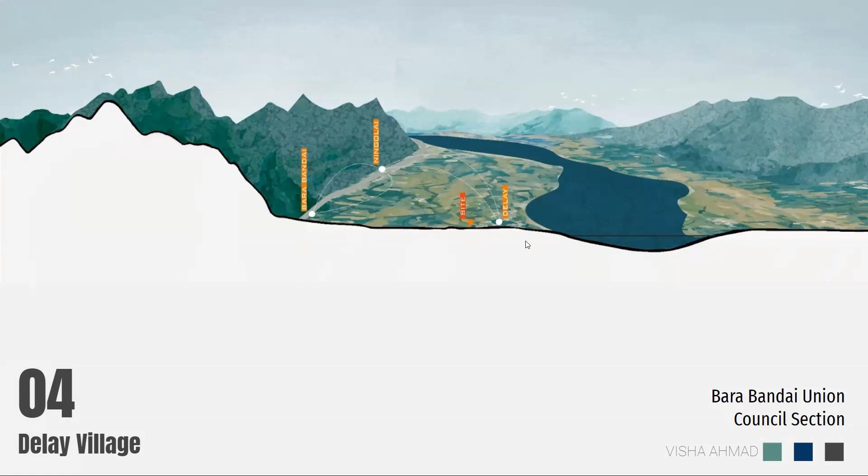This is a hand-painted and embroidered piece I made for my thesis, showing the craftsmanship known for the area in Swat. They're known for their embroidery, which many women in the area do, and it forms a way of social and economic resilience for women. Within this painting you can understand the grain of the area, see the main agricultural land, the proximity between the village and the river, and where my site is located.

My village is very small, just 1,600 people. Looking at the walking radius, you can see how my site is located centrally so people can easily access my rehabilitation and community center. They have the option of easily evacuating no matter where they are within the village, reaching the central safe space within 10 minutes.

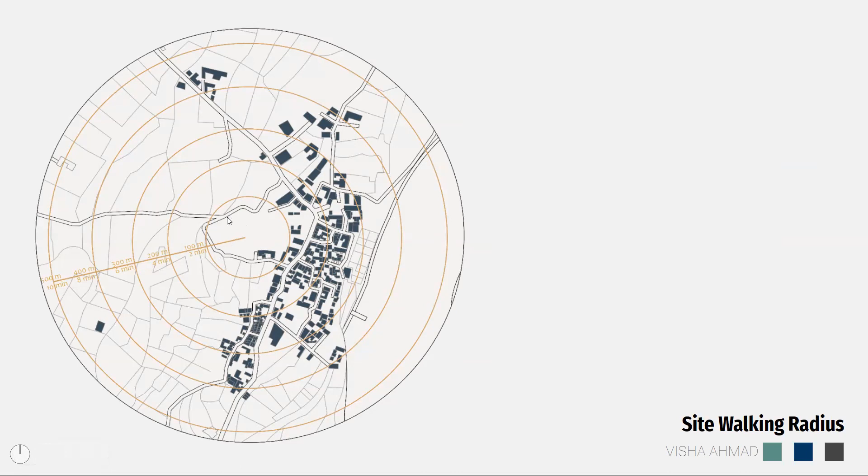Local crafts are a very big part of my thesis because that provides social and economic resilience for the people. They're known for their wooden crafts, embroidery, grass baskets, and wooden carving.

A really big part of the thesis was understanding the behavior of water, how it enters the site and how it would exit the site. At the end of the day, floods aren't preventable, but the idea is to be able to adapt from them and bounce back after a flood has occurred.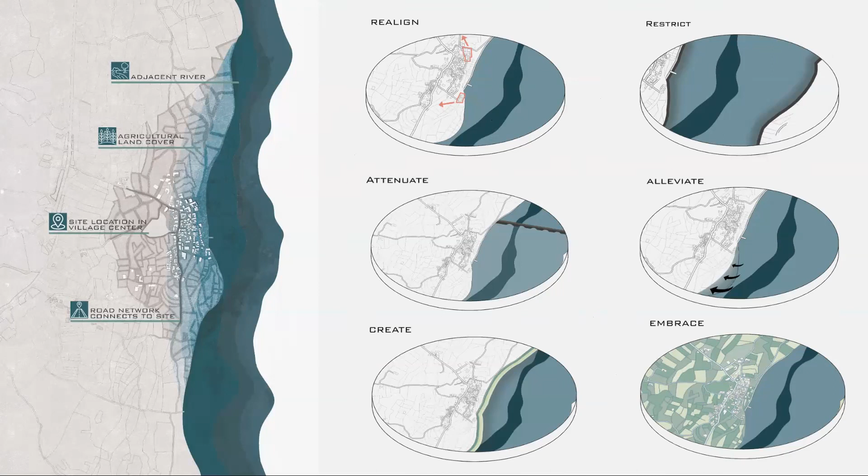Here you can see my different strategies. The ultimate idea is to embrace the concept of floods and see how infrastructure, architecture, and landscaping can all work together to provide resilient architecture.

Looking at my design synthesis, this is my master plan, giving you a very big image of the entire village and the urban grain. You can see the river and the immediate areas that are flooded during high river discharge. My site is at a large proximity from the immediate river boundary.

You can also see that within all the agricultural land and development, channels have been added, so when water comes into the site, it's also channelized out of the site.

A very big thing when designing for rehabilitation is the idea of panic and not being able to immediately evacuate. You have your belongings, people, and also livestock that you're trying to shelter.

A really big part of my design is to make sure the building is designed for accessibility, so the entire building is fully ramped. Even entering the plinth level, there are ramps on both sides, and there's even a central ramp that takes you up from the ground floor all the way to the second floor. Here you can see an overview, and then the different programs.

A big thing was that my building basically has two functions. On a regular day, it functions as a community center, and when a flood occurs, it becomes a rehabilitation center. To combine these two functions, different programs have been added.

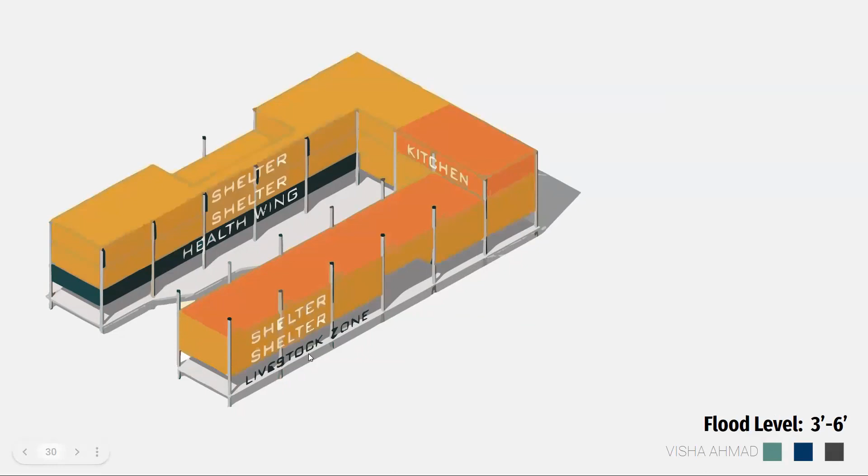When the flood level is from 3 to 6 feet, my functions actually adapt higher. So the ground floor becomes a livestock area where the shelter can exist. And then all of my other areas become shelter spaces, with the health wing still having its main function.

When the flood level is from 7 to 10 feet, because my ground floor is at 6 feet, when the flood level exceeds that, you have the capacity of bringing your livestock within the mezzanine floor as well through the centralized ramp system. So again, the livestock can be sheltered on the mezzanine during a 7 to 10 feet flood level.

Within my axonometric, you can see the ramp system that connects my building centrally. A big idea within the zoning and planning of my building was designing through very easy circulation, so when someone is entering the building in a mass panic, they should be able to circulate through the building and immediately understand where they need to go.

Within my mezzanine floor, this is my health wing. And then large areas like these, like the male zone, all of these classrooms have adaptable walls and sliding features that allow for adaptation in the program. That's why these areas, while it will be a learning floor during a community center, can become an entirely shelter-based space during a flood.

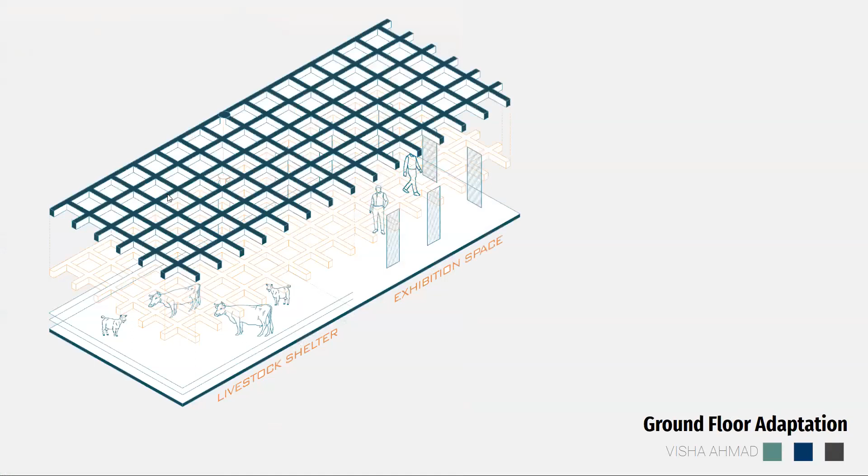Over here, you can see my adaptations and understand the difference between when it's a rehabilitation space and an exhibition space.

On my ground floor, the area can be a livestock shelter during a flood, but then it can also transform into an exhibition space through easy means of adding your exhibits on from the waffle slab and having features that can easily be removed as well. That's how the ground floor adapts.

Within the mezzanine floor and first floor, areas like classrooms can adapt into shelter spaces. An idea here was that the furniture would be designed so the tables can open up and form the platforms for the beds. I also have folding walls and sliding features that create larger halls for shelter spaces, so within one area you're able to have two different functions depending on your requirement.

And then even on my first floor, I have hujra spaces, and those can also transform into shelter areas.

So you can look at it sectionally and understand what my community center would look like when it's functioning on a regular day. You have all your classrooms, your library, your entire learning floor, and then you have your female zone, as well as your medical ward.

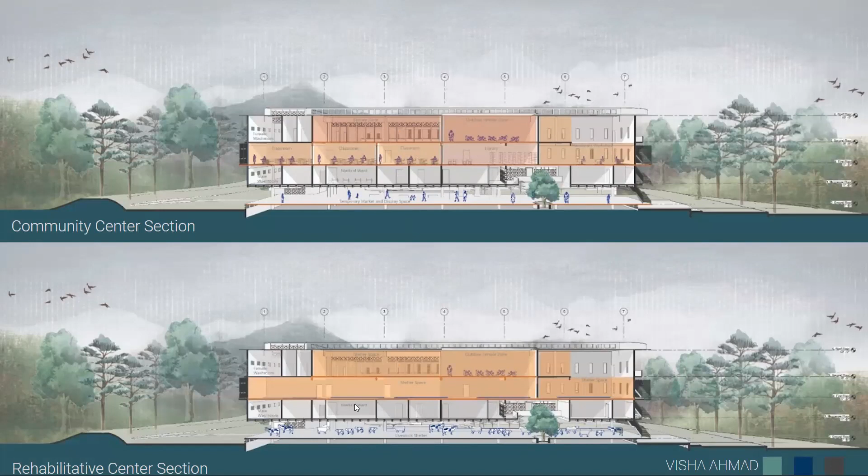And then when it's a rehabilitation center, you can see that all of the livestock can be sheltered on this raised platform, and then have all of your shelter spaces above.

A big part of my thesis was understanding the technical details and structural integrity of the building. A big part of that is, if a lot of water is coming in, how can spaces adapt and where can water be stored?

I have features within my landscaping that are platforms able to raise. So when there's a flood, you increase the surface area where you can have more people and more things protected from water.

With this feature, the platform could raise through the barrels, and you can see the flood water would be underneath within this retaining area. As the water dissipates through the channelizations, the platform will go back down as well. There's a very easy adaptation that doesn't require mechanical systems and electricity. That's something that's been considered throughout the design.

And then the idea of a raised platform, making sure that the whole building is raised to a sufficient level to prevent water from entering the building in the first place.

Moving on into drainage lines as well, because my building is raised up to 7 feet, there's channelization that has been designed to drain water out of the site and back into the river.

Again, this is an overview of my design. Thank you.

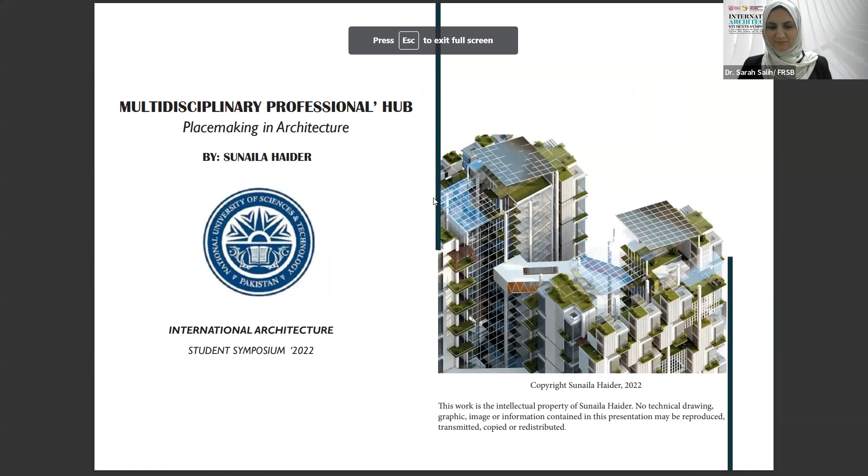Okay, so my name is Sunaila Haider, and my project is called Multidisciplinary Professionals Hub, Placemaking in Architecture. This is the overview of the contents I'll be covering, which include site analysis, master plans, some micro details, axonometrics, facade details, and interiors.

I'm going to start with an overview of what the project is basically about, since considering current times, urban sprawl is a very common problem, along with greenhouse gas emissions. So it calls for a need of a high density structure and high-rise buildings to ensure that the degradational environmental practices being practiced because of unsustainable design can be solved.

My project is basically a modular high-rise that tackles the issue of greenhouse gas emissions and carbon footprint to provide a solution ensuring the relevance of human scale is maintained, and it also implements the strategies and techniques of passive design, including natural ventilation and daylighting.

So giving an overview, the site is basically located in the capital city of Islamabad. It's called F10, a corner plot. It has natural contours and really interesting views of Margalla Hills, as you can see in the contextual views shown here.

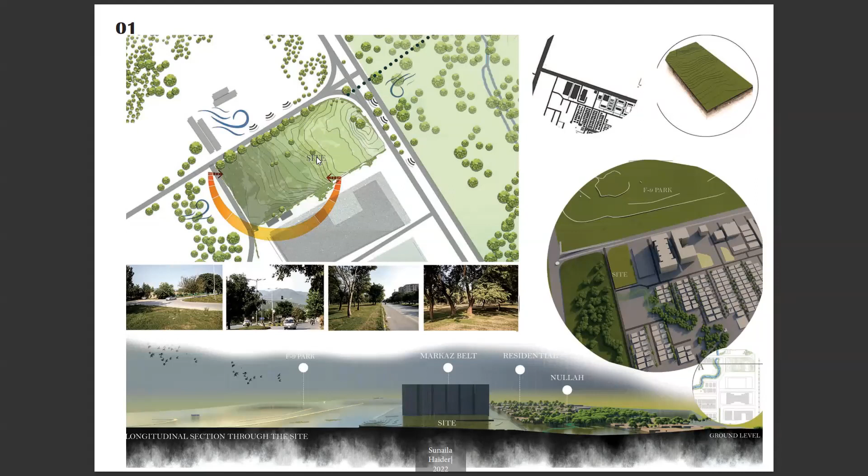F9 Park is right next to it. We have a residential context, and also commercial — it's actually located on a very prime commercial belt. The reason for choosing this site was so that this project is visible and stands out in an area where this problem, urban sprawl and detrimental design practices, is actually crucial. This is a site model showing the residential area, the commercial belt, the contours on the site, F9 Park, and the natural existing vegetation.

Coming on to the master plan, the building has been bifurcated into two parts. One of the primary things crucial to designing the master plan was the orientation of the plan towards north-south, because the orientation of the site allows the creation of extroverted and introverted courtyard spaces.

You can see how the modules have been arranged, with both the masses and introverted courtyards visible within the central zone. You can also see a pedestrianized zone and a public area, which shows seating spaces, some external sports areas, a running track, and also an outdoor amphitheater, which I'll discuss later.

This is actually a view of this specific zone in the master plan, showing the design of the communal space and outdoor activity area. Since it's a multidisciplinary professionals hub, it has a huge diverse group of users, so it ensures that it caters to all requirements, including seating spaces, running tracks, sports areas, and a zone reserved for vendors and kiosks to ensure economic diversity and opportunity for everyone.

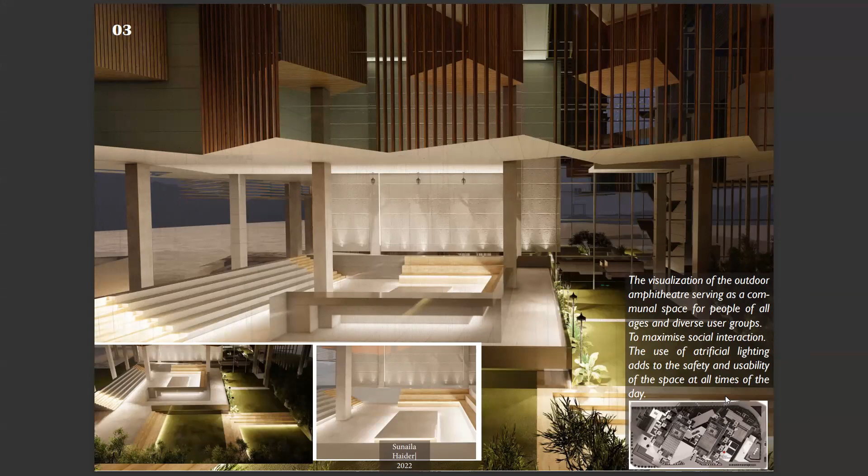Since, as discussed earlier, the title says it's a multidisciplinary professional hub, that means it has professionals from various fields, and some of the professionals may have families and children, so this sort of responds to the needs of seating spaces.

Since Islamabad experiences all sorts of climates, really hot summers and cold winters, maybe having a fire pit or water bodies surrounded by seating spaces actually ensures a variety in the ambient aesthetics of the space, and a herb garden serves as a communal node, bringing together people from the community and adding to the green and well-being element of the space itself.

So this is basically the plan view of the central pedestrianized zone, which is the primary communal pocket, and it's also a transition zone to ensure enhanced user experience when passing through towards the retail or commercial floors, or in general for a kiosk as well.

This is designed very symmetrically with a central water body for rainwater harvesting, and it has spaces under the shade of trees to ensure protection from harsh daylighting. Since it's in the middle of both the masses and both the towers, it serves as a visually interesting node between the two spaces.

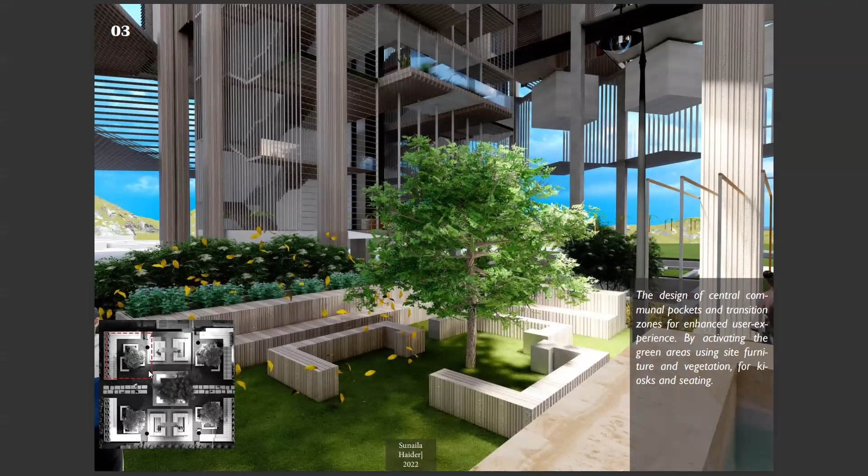This is another view from one of the corners of this central zone, showing how various layers of the structure of the design can be seen. You can see the porosity and connectivity between the introverted courtyards, the transitional spaces towards the extroverted courtyards, the staircases, the viewing balconies, and the various layers of structure ensuring that even in transition and experiential areas, you can connect with nature, with views of Margalla Hills.

You can see the hustle and bustle of everyday life on the ground floor, and people interacting on upper floors in the transition zone, making sure it's not an enclosed caged core but rather a welcoming space with a lot of porosity, natural ventilation, and daylighting that responds to various design considerations.

This view shows the connectivity between the vendor kiosk, the circulation spaces, and the water body area. The scale of vegetation and choice of plants has been varied to ensure the central zone and central water body remain the focal point of the whole area, while nothing overpowers any other element.

This is another view of the same space showing the hierarchy and symmetry, and how a tree or any green element is always the focal point of the space.

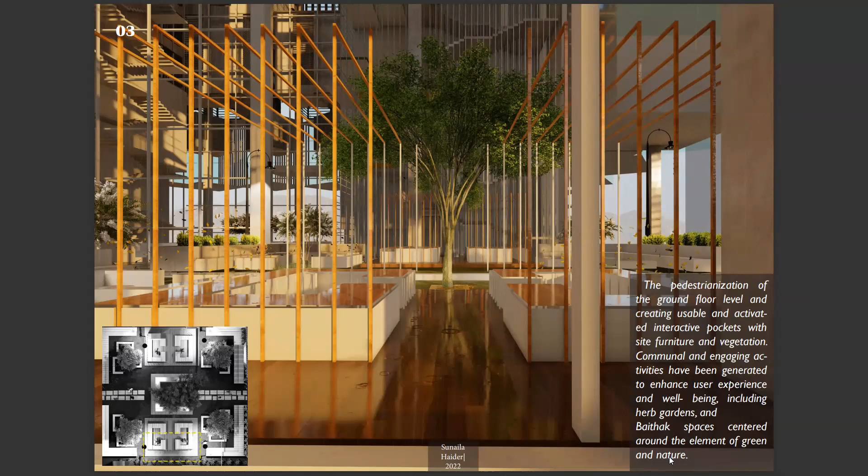These elements ensure pedestrianization, and since the site was naturally contoured, this also ensures that the pedestrian experience is highlighted in all places.

This zone is right adjacent to the central pedestrian communal zone. You can see how lighting has been used and visual connectivity created between the hierarchy of different spaces, like how the introverted courtyard responds to the extroverted courtyards, and how the context is visible in the background.

Instead of clean-slating the site, it was important to respond to the natural topographical features and create micro-terracing as an opportunity to design experiential, threshold, and transition spaces for users, ensuring creation of north-facing courtyards for optimum diffuse daylighting rather than harsh lighting.

This is another view of the space showing the variety of vegetation and plants used. To ensure accessibility for everyone, we've provided ramps and these spaces for everyone. This is a holistic view of the form itself.

It shows the offset between modules and how vegetation and green elements are an integral part of it, with special focus given to ventilation voids and solar consideration to ensure the element of sustainability.

To design this and define where the voids, communal pockets, open and porous green pockets, and shaded louvered green wooden decks would be, the consideration of wind directions was very important, especially for the commercial and residential floors alike, to ensure optimum air quality and minimum dependence on artificial lighting sources.

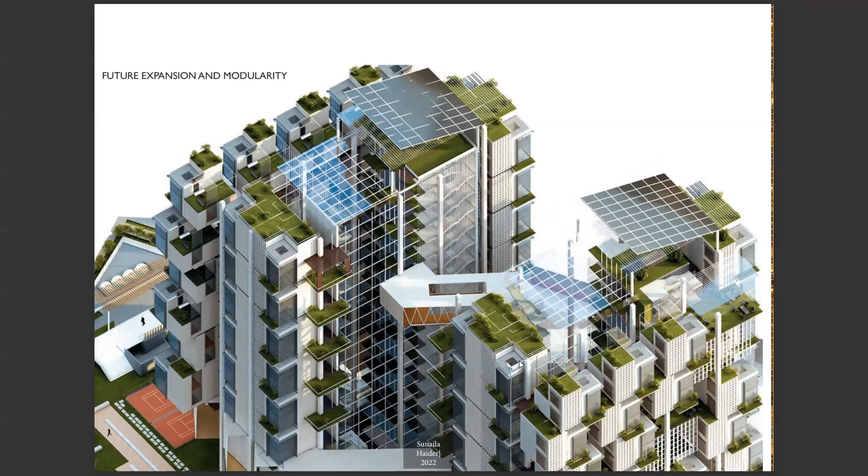So here I've also considered the element of future expansion and modularity to ensure that the tower and the building responds to needs of the residents in times to come as well. You can see some of the modules are two-story high and completely enclosed. However, some of them have these frameworks with open spaces and the opportunity to actually expand as per the needs of residents later on.

And now between the two towers that are connected, the bridges that are connecting the two towers, you can see how the elements of porosity, visualization of natural daylighting and ventilation is again highlighted, and a connection to the context is also generated that sort of frames the views in the context.

And the building not only has a contrasting nature, contrasting form compared to the buildings in the context, but it still does not dominate the structure itself.

So here, this is the study of the facade and the study of the form to ensure the offsetting, how it's going to respond to the various requirements of natural ventilation, daylighting. You can also see the various scale and proportion, the structural elements and the louvers, design elements, and the element of vegetation, the green element in the facade itself.

So this is actually a blow up into one of these larger voids that you can see here. And here also I've provided seating spaces and green decks and seating spaces for people, and lighting has also been provided within these voids to ensure the element of placemaking and human scale.

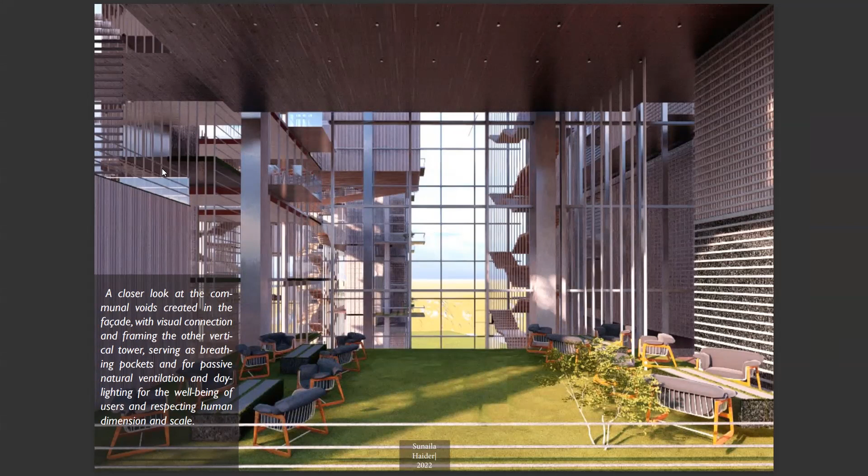And you can see the commercial floor has a different orientation as compared to the modules in the residential floors. So there's a reason behind them, because we have different spatial requirements, different planning requirements for the commercial floor, and different daylighting and ventilation requirements for both residential and commercial floors.

Okay, so this is a view, a close-up into the reception area and the foyer area of both the cores of the towers. Now you can see it's a double-heighted space to ensure that it's very welcoming and it's not an enclosed core like a typical core.

So it has, again, visual connectivity, elements of porosity. It also has the provision of artificial lighting for the users. And this is again another view from the double-heighted space.

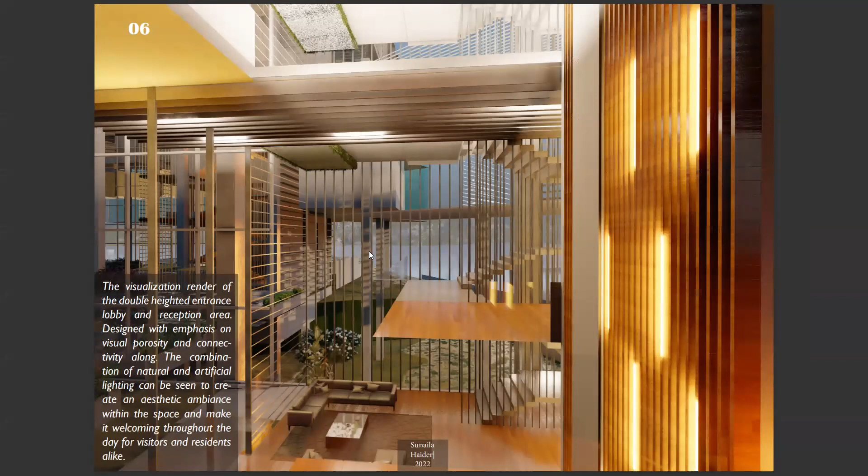And in distant view, how you can basically see the connection between the extroverted courtyard and the introverted courtyard, and how they all come together as one in connection to the core as well.

Now, on a view on the inside, this basically highlights how the modules have been arranged and how the spaces have been created for ventilation between the modules themselves. You can see various textures, various materials, public spaces, private spaces, circulation spaces, the green decks that have been created, and various layers of structure and detail, and the skins for ventilation and daylighting.

This is a similar view of the space, and that would be it. Thank you so much.

Okay, thank you very much, Sunalia. It's really impressive how you have developed your concept into the forms and all these levels, the ventilation and so on. It's really impressive. Thank you very much for your presentation. And of course, thank you very much to all of our students and participants today for their contribution to make this happening today. Really interesting presentations and projects.